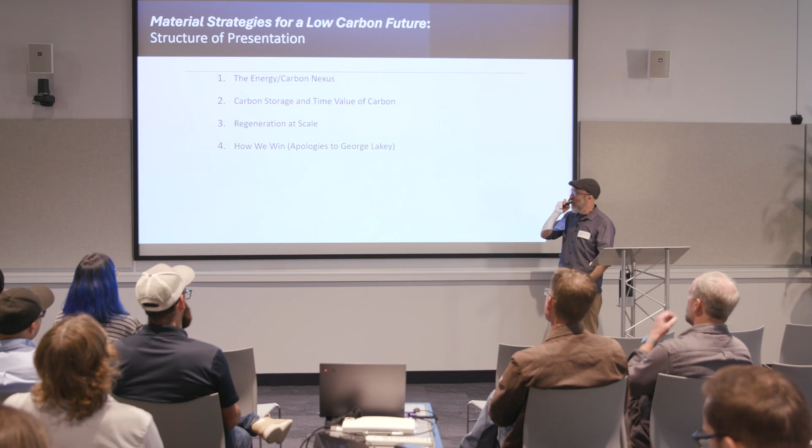I'm going to start by talking about the energy-carbon nexus, the relationship between energy and carbon emissions or greenhouse gas emissions, and particularly embodied carbon, and how we can start looking at them and thinking about them together. Then carbon storage and the time value of carbon — that's where it's going to get a little bit nerdy, but also super, super important as we expand our ideas around carbon flows and our relationship to carbon in the built environment. Then regeneration at scale: what this looks like in taking some of those principles and bringing them into practical application, moving from boutique niche applications to broader industry transformation. And in the end, how we actually all collectively work towards achieving industry transformation as a community and as an industry. So that's where we're going.

Let's start with the energy carbon nexus. And apologies, I don't have another monitor here, so I'm going to keep doing this so I make sure I know where I am.

So this is to level set with the first couple of slides here, to make sure we are all on the same page around how we think about buildings and the built environment and its relationship to climate impact.

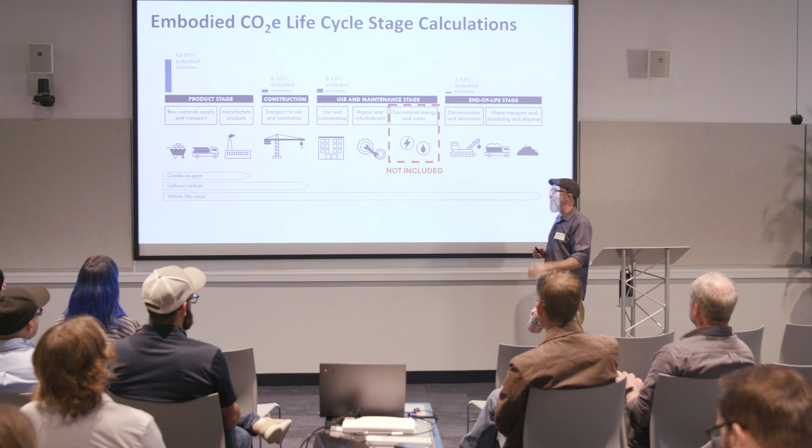So I want to start by defining a bunch of terms. When we think about historically the building's relationship with climate impact, that usually relates to the emissions associated with making energy to run our buildings. That's the operational energy and water part of the life cycle.

But in the entire life cycle of what it takes to put a building into operation and then through its life, that's only one part, and it's not even the beginning. We really start the clock at the extraction of raw materials out of the ground, or from wherever the provenance of those raw ingredients comes from.

The process of extracting those materials, transporting them to a manufacturing facility, and manufacturing them into products, we call that the product phase, the material emissions, A1 to A3 if you're an LCA nerd. That combined with the process of bringing all those materials to the site and combining them together to create buildings, all of that together is upfront carbon.

That's essentially the carbon footprint of the building at day one of its operation. Those emissions are already in the atmosphere. All of that impact has occurred because of decisions that engineers, architects, and builders have made around creating those buildings — others too, I'm just calling us into our participation in that process.

Cradle to gate, you'll hear that phrase too — that's the product stage, the gate being the factory gate. A lot of the analysis I'll talk about is within those boundaries, looking at material or product emissions. In low-rise construction, which is where I do a lot of my analysis, that's the lion's share of the emissions over the life cycle, so a lot of focus and data is for that phase.

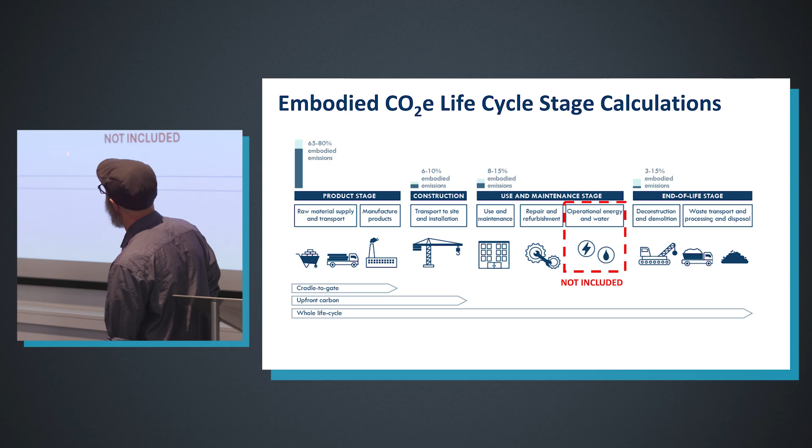Moving forward, now we're in the building — it's on, operated, and occupied. There's use, maintenance, repair and refurbishment, interior fit-outs, and mechanical replacements. You'll see those repeating over the course of time.

Typically there's less materiality going into the building during its use phase, but a whole lot of operational energy and water. This is not included in our definitions of embodied carbon — we look at operational energy separately from all the other emissions of buildings, and we'll talk about how we look at both of those together in dialogue and balance.

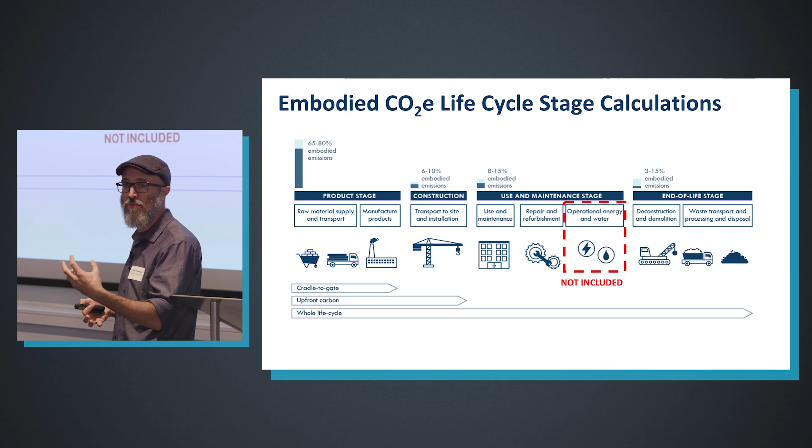Finishing out the life cycle, the end of life has its own emissions: deconstruction, demolition, transport, processing, and disposal. Often a lot of greenhouse gas chemicals are released from materials that may be bound in them, as well as the energy it takes to process the end of life of a building.

There's a D phase here not shown, which is recycling and reuse of materials — the end of one phase is the beginning of the next. So if you've heard of circularity or the circular economy, that's taking this unidirectional take-make-waste paradigm and bending it into a circle, seeing the outflow of deconstruction as the inflow of new materials to the next building. I'm hyper-simplifying here, but just making sure that concept is in play.

So when I use the language 'embodied carbon,' it's actually shorthand for embodied carbon dioxide equivalent emissions — too many words to say otherwise. Embodied carbon technically refers to this entire life cycle, again except for the energy and water, but often it'll be used to describe just one part of the life cycle.

If we're just looking at the product stage, that word will be used for different parts of the life cycle, which is where this all gets really confusing. Even the word embodied is confusing when we start talking about carbon storage. So I'm going to acknowledge the confusion around the language, and if anyone's confused around terminology, that is legit, please ask for clarification so we all know what we're talking about. This is why I'm taking a minute to just define some terminology and some boundaries and principles here.

Oh yes, so CO2e, I want to define that. When you see that little E at the end of CO2, that stands for equivalent. To get an actual metric, a single unit that can quantify the emissions from any part of these processes or the whole process, it's not just carbon dioxide. That's not the only greenhouse gas being emitted. There's methane, there's all sorts of propellants that can be incredibly potent. There's a whole constellation of chemicals that we release, but it's really complicated to try to look at all of those individually.

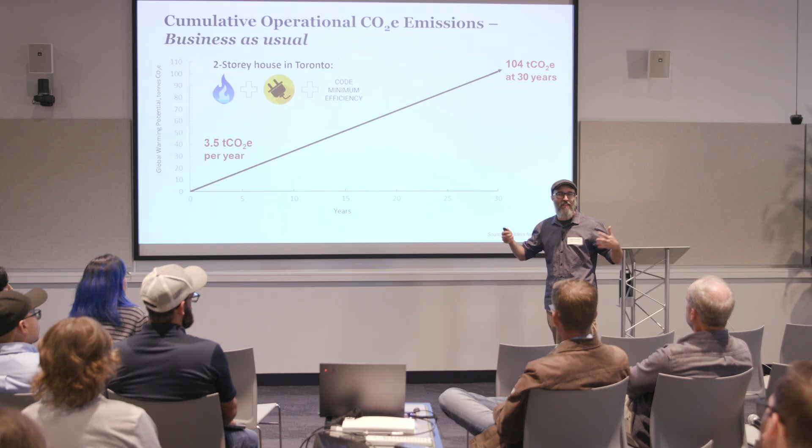Okay, so let's start with some of the basics, just to make sure we're all on the same page. This is stuff that we are already doing and know how to do well. When I work with builders for climate action, we do a lot of research, and a lot of our focus is on the residential construction side of things. So you'll see some references here to low-rise residential, but the principles apply to essentially all buildings, with some exceptions.

If we look at a two-story house in Toronto that has an energy mix of natural gas for heating and hot water, plug loads for electricity for lighting, and plug loads for cooling, built to code minimum efficiency, a typical Toronto building is going to release about 3.5 tons of emissions per year, year upon year upon year. So over 30 years that's about 100 tons of emissions - that's the business as usual case.

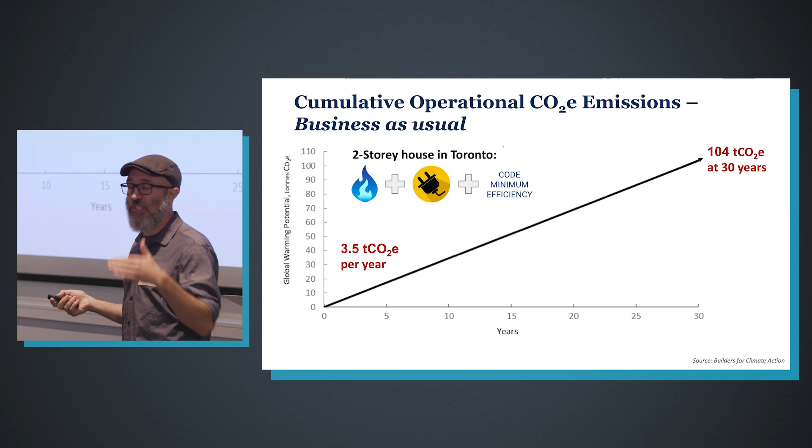The work we've all been doing as an industry for generations now is to reduce the energy loads, and more recently to get off the more emission-intensive fossil fuels into renewably powered electricity to reduce emissions from the energy we're consuming. So we turn this into a high efficiency building, improve the enclosure, reduce the loads, and switch everything over to electricity. Toronto's grid is relatively green, or low emission, and so that really reduces the annual emission profile of that building - a huge reduction in emissions. We know how to do this, we know what the strategies are. The real challenge now is just doing this all the time for all of the buildings. All this language around scale, industry transformation, and the electrification revolution and transition - that is what this is.

There's always new technologies and new approaches and new ways of getting there, but this is what our task has been for a while. It is absolutely critical and imperative that we continue along this path.

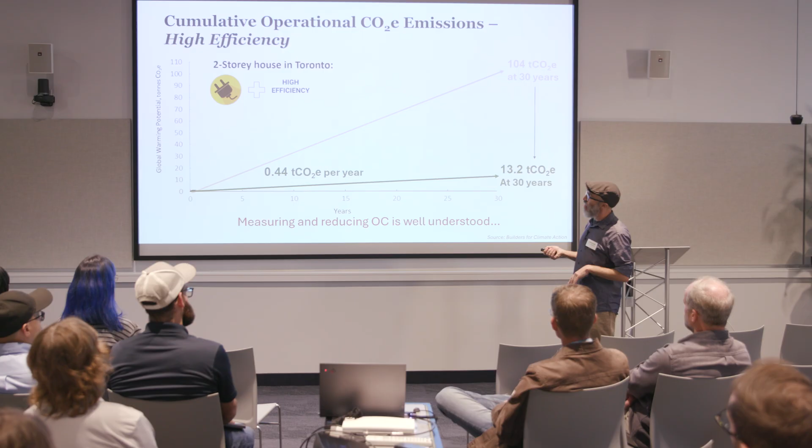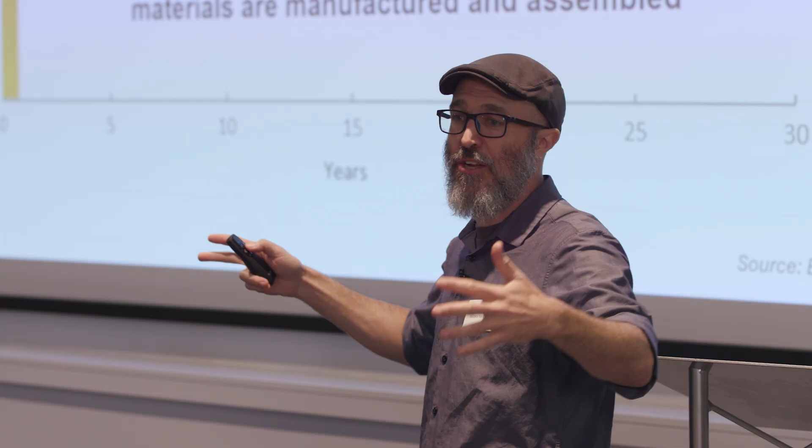This is not an accurate graph, because we don't actually start at zero, and we don't start on day one of operation. As I mentioned in the last image, there is a footprint to the building when we start the operational phase. If we're trying to set goals around decarbonization by, say, 2050, we need to know what this is to actually know what our emission profile is by the time we hit 2030, 2040, 2050, whatever number we're trying to get to. So that becomes a pretty critical part of the analysis we need to bring in if we're trying to reduce these loads and switch over to electricity for the endpoint goal of reducing our emissions. If that's our goal, we need to have our analysis boundary wide enough that we know what that initial footprint is and address that as well in our strategies.

And so that's where these material carbon emissions come into place. That's really the upfront emissions. It's transportation and construction as well. And it gets a little more complicated to do those last two phases. We can talk about that over beer or Q&A. But suffice to say, those upfront emissions, plus not only the energy that we're using, but the energy source emissions that are released from that energy - those are all part of the equation.

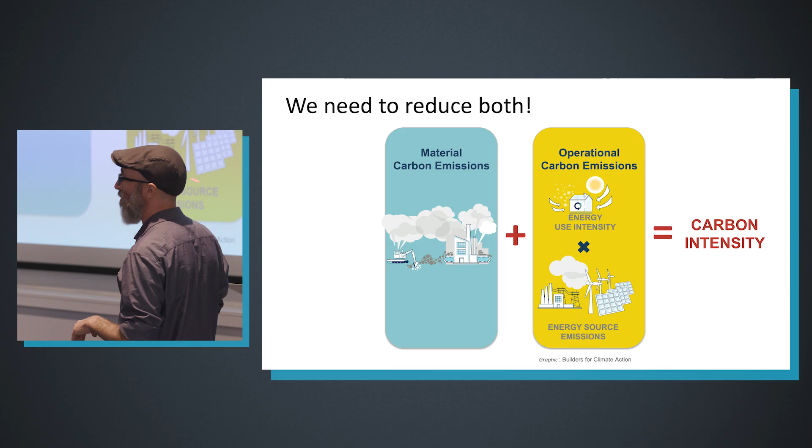So for a long time, energy was a proxy for climate impact. And it's just not that simple. That is critical - we definitely need to bring our loads down for a host of reasons, and we'll talk about a bunch of them. But where that energy comes from and what the emission profile of that energy is, is also crucially important. That's where the electrification movement, and bringing down peak loads, and a lot of the nuances and details around electrification show up here. And then all those other upfront emissions are all necessary to understand what our carbon intensity is and to hit our near-term climate reduction goals.

So we also have data to back this up. It's not just theory - we have studied this repeatedly over many different buildings, and we consistently see the same results: that it's not until we're reducing both the upfront and particularly the material emission profile of our building, as well as the operational performance and the energy behind that building - if we're not solving for both of those problems, we really just don't get to low carbon outcomes. So there's data to prove the thing I was just talking about.

So I want to call out some of the confusing - I'm going to try to be generous and diplomatic here, and we'll see how long I can keep that going - some of the confusing analysis I'm seeing in the marketplace that I want to address directly, because this is getting more confusing as we move forward in time, and that is a major risk to adoption, to making change. Anyone that has been on the sales side of this whole building world, or really anything, the number one barrier is confusion. If someone is actually fired up in opposition, like 'oh wait, there's an entry point, we can talk about this, that, or the other' - but if people are just confused, it is a barrier to taking action.

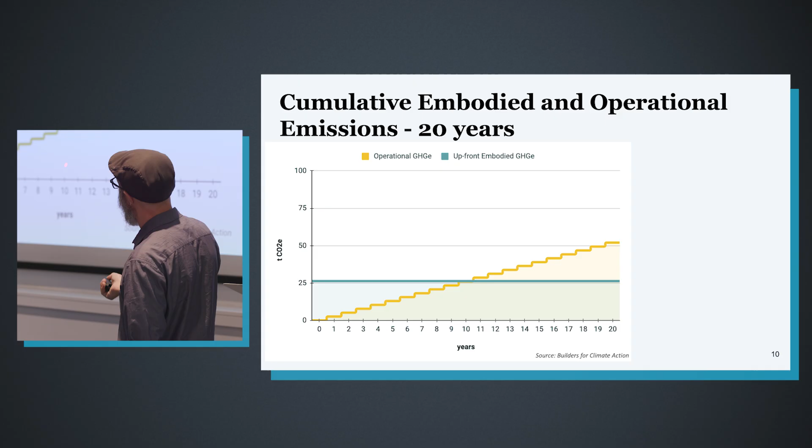So I want to talk about some of the confusion that I see in the market, which is this: I'll often see analysis like this, that we've got year upon year upon year of operational emissions, and then there's an upfront emissions line that gets drawn across, and then we look for that point where there's a crossover point. Let's say there's a balance point, or even worse, payback after 10 years.

How do we use that information to make good decisions around decarbonization? Right, I don't think it is useful. I think there's some very specific cases, maybe around material reuse - or let me say it this way: if you need to figure out what that balance point is, you've already lost control of a whole lot of the conversation around the outcome of the building. Balance point's in the past. That's a great way to describe it.

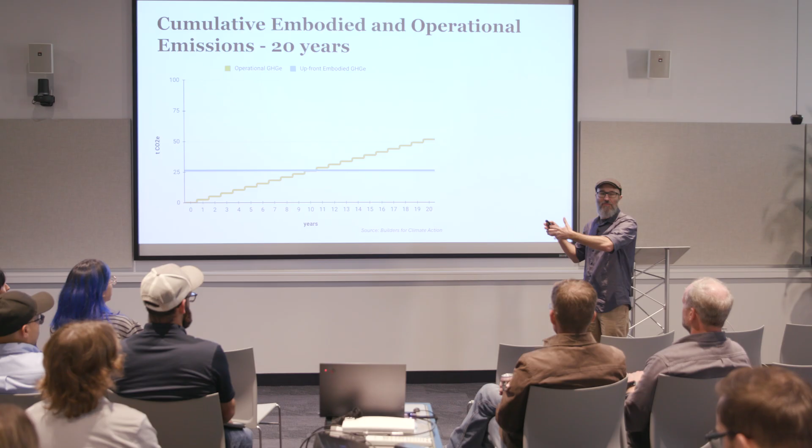Yes. So if you are seeing conversations around this, be critical as to why - what is this frame, and what is the information we're supposed to be getting out of this. This is also not technically accurate from what the atmosphere is experiencing. The atmosphere sees this: we're starting at this point and then adding more, and we don't get to zero until we reduce both.

So I want to try and simplify some of the noise around trade-offs and balance points. I see a lot of this coming in the conversation of insulation. We need to solve for both problems and get to zero across these various timescales. I want to float that out there to dispel a lot of confusion, as these ideas become more socialized and we're all trying to figure out the relationship between materials and energy. That's number one. We can talk more about that if you'd like, but put that down for now.

I want to look more explicitly at some of the strategies we've been using to reduce operational emissions, and then how that relates to the embodied emissions that come along with those strategies. The TLDR is that in pretty much every case we've found, there is at least an opportunity to significantly mitigate the embodied emissions from the materials used to reduce operational energy, if not actually reduce both. It's just a matter of developing strategies that hold the whole and consider both the embodied and the operational emissions.

My favorite one is reducing building size and surface area. Do we need to build the largest building our budget can afford, or do we build the smallest, best building that the programming requires? We don't always have the opportunity to ask that question, but for those of you that do, it's fundamentally important. And does the building have to have 18 corners? Could it have 10 corners? Could it actually have 4 corners?

The hero architects in my eyes are the ones that can take simple buildings and make them look incredible. Because that's the category where we know that by having more corners, we're increasing thermal bridging potential, increasing disruptions and air bypasses in our air barrier, and absolutely increasing the cost.

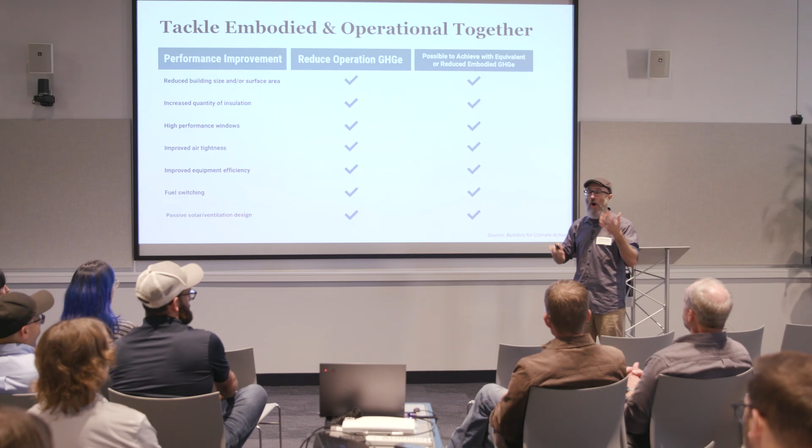When I was in construction project management, we would often do our pricing not by cost per square foot, but by lineal feet of construction, because that's where all the construction costs go. On the materials side, we're consuming way more materials for that complex, increased surface-to-volume area, as well as the amount of waste because of all the weird sizes and shapes, and the waste profile goes up significantly. So if we can solve for waste, embodied carbon, operational energy, operational carbon emissions, and cost with the same move, those are the strategies we need to identify early and lean into.

The win-win-win-win-win strategies are crucially important. So there needs to be a much better justification for why that building has 4 different roof profiles and 18 corners if it's causing penalties all along the rest of the pipeline.

Insulation is another really interesting one. There's a version of the story where we're consuming more insulation to reduce the operational emissions of our building, but that insulation has an embodied emission profile, so that number goes up. If we recognize there's a potential conflict there, that compels us to spend a little more time and energy to find a lower emission insulation, or maybe even an insulation that actually stores atmospheric carbon, and win in both of those categories. But we have to identify that we need to solve for both of those problems early enough to bring that into the strategy.

We can keep going down the list. I'd actually be happy to go down the list. I'm a little worried about getting completely distracted and blowing our time entirely, so I'm going to keep moving forward. We can talk about windows and air tightness, all these other things.

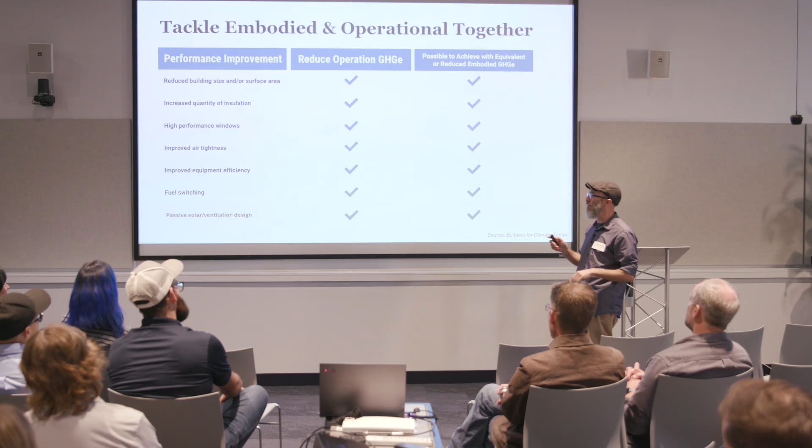I am going to talk for a minute about mechanicals, because that's fascinating as we're seeing the proliferation of heat pumps entering the market to support the electrification process and solve for the energy and operational emissions side of the equation. I have a mechanical design background, and I've been studying the emissions of MEP equipment pretty heavily the last few years.

There's another win-win-win scenario that shows up here: the old approach for sizing equipment was to significantly oversize it, to make sure there weren't callbacks and everyone had all the heat they needed in the wintertime. What we're finding now is that when we oversize heat pump equipment, it has really negative consequences on occupant comfort, and very negative consequences on the energy efficiency of that equipment.

The oversizing can lead to short cycling, which will depreciate the life cycle of that equipment, so it becomes more expensive and needs to be replaced more frequently. What we also see on the embodied side is you're using more equipment, which is typically pretty emission-intensive, like circuit boards, metals, and highly processed equipment.

Those larger pieces of equipment have greater refrigerant charges and often much more complex refrigerant distribution systems within the building, like larger and more complex VRF systems. What that means is refrigerant has some of the highest CO2e ratios of any of the materials we use. R-410A, which up until recently has been the typical refrigerant for smaller systems, is 2,100 times the impact of a molecule of carbon dioxide.

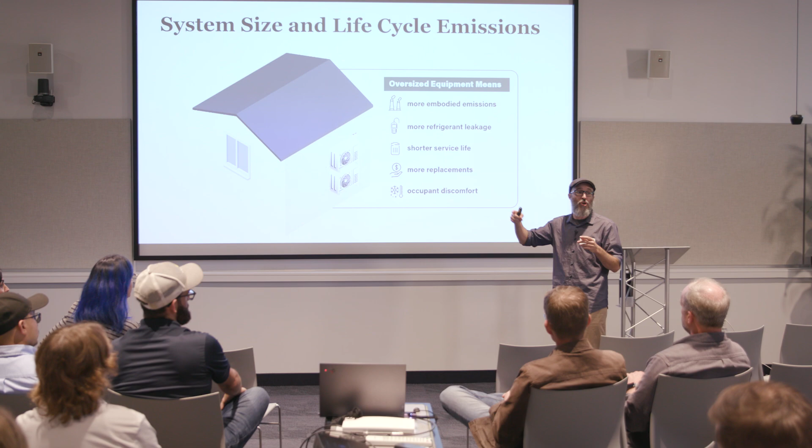Now we're converting all of our buildings to be on refrigerant-powered systems. So if we're oversizing those systems, we now have more refrigerant that could potentially leak, and as they get more complex, there are more potential points of leakage across that distribution system. As we reduce and right-size all of that, we're also solving for these embodied carbon emission problems associated with heat pumps. So again, win, win, win, win.

By revealing that value, it can compel us to spend a little more time on mechanical sizing and right-sizing the mechanical system. Maybe even moving from a VRF distribution, a refrigerant-based distribution, to a hydronic-based distribution, which not only reduces all that refrigerant, but makes controls easier and reduces the risk around oversizing, particularly on the cooling side of things.

So again, all these points of alignment, but if we don't recognize that they're aligned, they're really hard to defend when you're trying to usher a project through all the stages of design and all of the associated first-cost filters that tend to make a lot of these optimization opportunities fall by the wayside as we go through the complexity of bringing real buildings into the real world, let alone the replacements.

Because remember now, if we're short cycling a piece of equipment that goes from a 15-year lifespan to even a 12-year or 10-year lifespan, that means you're just repeating that entire consumption and disposal cycle again and again with that much greater degree of frequency within the lifespan of the building. So there's a lot of alignment here.

This graph should look pretty familiar. This is a very typical graph around cost, and the best way to address cost in a project is very early on, where you can make the greatest number of moves for the least amount of effort.

We've also seen this. I have an energy modeling background, and this was sort of drilled in. Oh, that last little part. Imagine this continuing, I'm not quite sure why that didn't show. Maybe it's white, I don't know. Anyways, apologies, but you can imagine that continuing along there.

Very similar with energy efficiency. Anyone in the passive house community here? Some nods, okay. So anyone, whether it's passive house or net zero or whatnot, anyone's been in the experience, and those of you in the construction space, I imagine, have probably heard this.

We're like, all right, our building's basically done. It's the end of DD, or you're looking for some feedback. Can we make this a passive house building now? No, you can't. That ship sailed like an entire phase ago. That was three months ago. We could have said no problem, but now it's really expensive to try to implement that, right?

It's the same thing with all this carbon reduction. So really the first question is, if you have the agency to say, do we actually need to demolish something and build something new, or can we work with what already exists? The lowest carbon building is the one that's already there, with some exceptions, but for the most part that's a general principle.

So anyone that has agency of even being able to answer that question, that is the highest hand on the lever we have. If it's adaptive reuse of existing infrastructure, all the emissions of its construction are already in the atmosphere. From that point, yes, does it have to be enormous? Does it have to be complicated? Do we have agency, from a design perspective, in reducing that impact? And I'm going to say that's not just for designers.

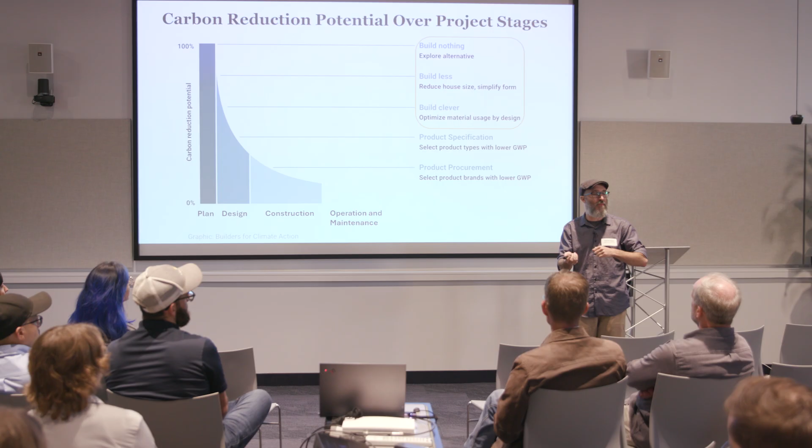Building clever is, can we simplify the structural grid? Are there mechanisms we can use to dematerialize the building, saving cost and also saving materials at the same time? By the time we're trying to look at what is the right insulation product to use or what's the best cladding, I'm not saying that's bad. We can make enormous benefits in just optimizing for the best drop-in replacement of a high emission material for a low emission material. But your options are down to here, right, so many decisions have already been made. There's only so many more decisions left to make if you're only looking at materials.

But that's a great place to start. So if you're new to all of this, simple one-to-one material substitutions is a great walking in the doorway to explore what are my opportunities on the material side. And the further up the line you go, the more opportunities there are available.

If there's ever been a justification for the value of integrated project delivery and bringing construction and design knowledge into the project development process, it is this. So there's yet another value, not just in project efficiency in terms of its delivery and making sure that what happens in the field is actually what's represented in the drawings, but also to be able to really optimize for carbon reduction.

So to explain this in simpler terms, when we've been thinking about the built environment's relationship to climate impact, it's been like this left side of the image here, where you've been extracting carbon reserves from deep underground that used to be plants and animals. They were part of the biosphere millennia ago, and over a long period of time and geologic pressure have been consolidated deep underground. And we are dramatically intervening with the carbon cycle by extracting it from those deep, long time cycle stores and burning it for energy, and then the byproduct is migrating that carbon up into the atmosphere.

So we've been participating in accelerating a carbon flow cycle from a storage state deep underground up into the atmosphere. And the goal is to do less of this. Actually, the goal is to do zero of this.

So all of the energy management transition we're talking about in the first handful of slides, that's this, to which I'd say absolutely critical. We need to be doing more of it better and more efficiently and faster. It is completely imperative, foundational, necessary, and wholly insufficient if our goals are actually to reduce the chemical balance of the atmosphere.

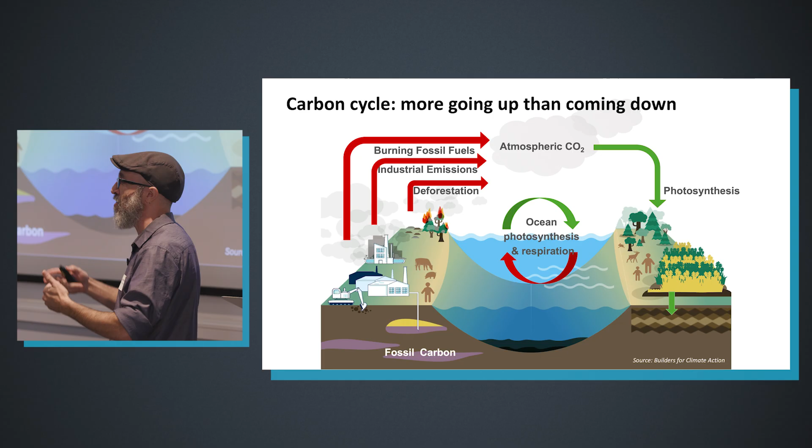Zero is not a sufficient goal. If that is our goal, zero operational carbon, that's fine, but that's not actually addressing what it means for us to continue to maintain human civilization the way we know it. If that's the goal, then we need to widen the boundaries and look for other opportunities to adjust the imbalance of carbon concentration in the atmosphere, in this case, in the form of carbon dioxide and associated greenhouse gases.

So I'm going to invite us into two other concepts. Does anyone know what the largest sink of carbon is on the planet? The ocean. Like, how much of the carbon in planetary ecosystems are in the ocean? Like 78%, roughly. Those are numbers I've seen. Like the majority, right?

So if we really care about atmospheric carbon balance, then everything we can do to keep microplastics and forever chemicals and phthalates and all this toxicity out of oceanic ecosystems that are depleting those ecosystems and depleting the ocean's capacity as a carbon sink, that's every bit as relevant or maybe even more relevant than our direct emissions. So this is how interconnected all of this work is.

I'm not going to be talking about oceanic ecosystem health and plastic and toxicity proliferation in this presentation, but I absolutely could. John, question? Just clarity, when you're talking about carbon in the ocean, are you sort of thinking about that as sort of available cyclical carbon or sort of stored carbon the way that fossil carbon is?

Oh, so the question is, like, the carbon in the ocean, is it like deep, long storage like it is in fossil carbon, or is it more cyclical? It's much more cyclical. I am not qualified to get into the details. However, I know there's numerous different capacities and rates of storage and transfer between plants, flora and fauna in the ocean, as well as within the water itself, and its relationship with the atmosphere, as well as with other pools. So it's really complex, very dynamic, but much more dynamic than the long time cycle of storage deep underground.

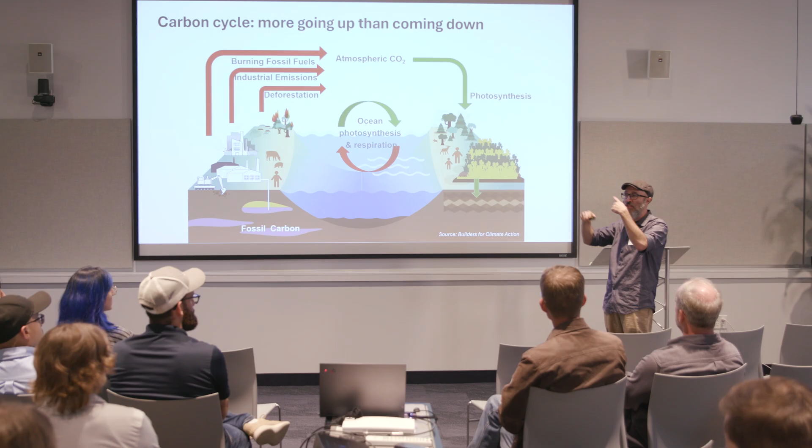What I will say is that this is something we have direct agency in. We have direct agency over mitigating harm here. We have direct agency in spending billions of dollars of our consumptive power as an industry consuming products, to spend some of that money on sustainably managed forests and agricultural systems that are already doing this and managing the carbon flows coming out of those systems that right now are just going back up into the atmosphere when the residues coming out of forests and agricultural systems just decompose or burn and go back. So we can positively and proactively engage in managing the carbon cycles, the same way that we're proactively and negatively engaging in the carbon cycles on the left-hand side.

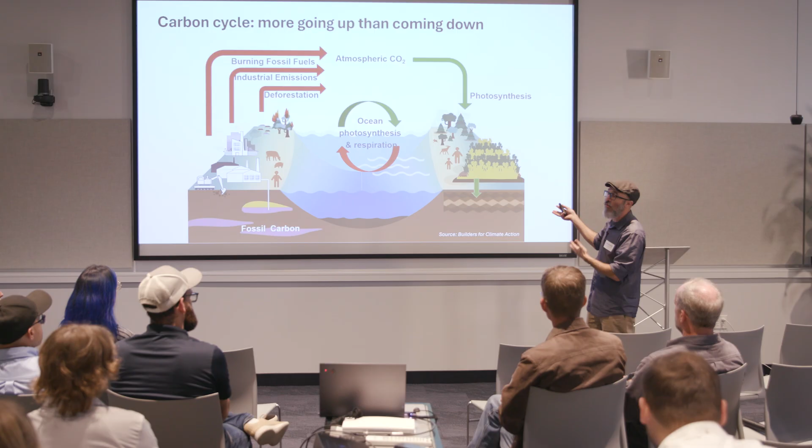I really get frustrated with the idea that, oh, humans are just a cancer, and if we were just off the planet, it'd be fine. I'm like, or we could actually recognize we have the capacity to do good as well as harm, and leverage that to proactively take action to decarbonize the atmosphere through investing in systems that are already doing that and manage the carbon flows of those systems well right now. So that's what I'm going to focus on a little bit.

This isn't just theory. This has been very well researched. The most comprehensive research I've seen comes out of the UN with a bunch of folks from the Yale Center for Ecosystems and Architecture that have done both technical and economic studies around this at scale across the globe. That's a great resource if you want a little more meat on the bone than just my quick visual narrative around this. There's also a really strong market imperative around this.

Amazon has been funding really terrific research by well-qualified, neutral forest industry professionals to figure out sustainable forest supply chain management, because it's in their business case to do so. And it's not just Amazon. This isn't just environmentalists or academics who care about this—there's a very strong market drive and market imperative around figuring this out, just in case anyone's skeptical as to whether this is all just hooey.

Question: when they talk about sustainable, do they care about people as well, or is it just about embodied carbon? That's a great question. This report—I'd have to look into the details to understand how much social impact is valued here. I know it's broken out geographically based on different forest typology, and associated industries are evaluated, but whether human well-being or cultural well-being is held as a key performance indicator of success, I don't know. That's a crucial question, and I'm actually going to talk about that briefly, so thank you for prompting that thought—it's coming up shortly.

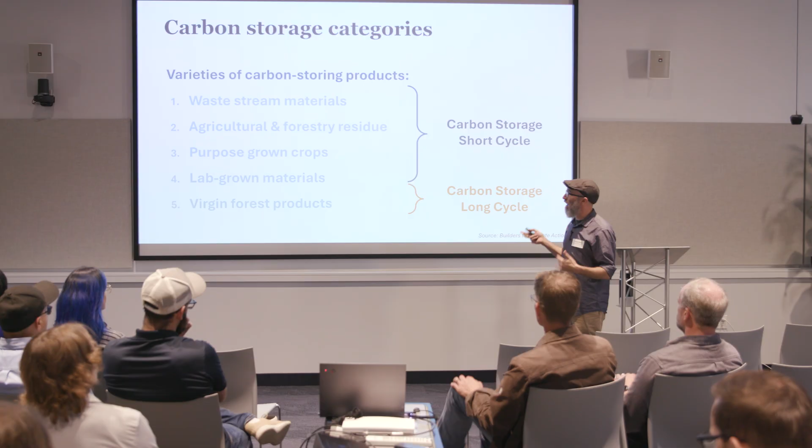Builders for Climate Action is really committed to advancing this idea and revealing the opportunities around working with bio-based materials as a near-term solution for atmospheric decarbonization. We recognize that if we're just talking about biogenic carbon as a big lump, we just talk about trees—which isn't bad, but it's incomplete. We need to break this down further to develop more granular and a broader diversity of strategies around working with bio-based materials.

So we have two basic categories we've assigned: short cycle and long cycle carbon. The short and long cycle refers to temporal cycles, time cycles. We're looking at plants that are less than 10 years in their growth cycle, or carbon that's going to be near the end of its life cycle soon, compared to plants that live a really long time—decades—through which that carbon will go through its cycle.

Examples of short cycle carbon: waste stream materials. Has anyone worked with cellulose insulation? This is cardboard—a whole bunch of Amazon boxes destined for the landfill. Some of that may be petrified, but a lot of it's either going to turn to methane or carbon dioxide. So we're appropriating waste stream materials destined for their end of life, intervening in that cycle and reappropriating those materials to be long-lived building materials, keeping that carbon stored in physical form out of the atmosphere.

Ag and forestry residues work similarly. Otherwise they would be going through their end-of-life cycle and cycling back into the atmosphere. We're talking about intervening and interrupting that cycle, redirecting those physical carbon stores into physical materials that stay on the planet—stored in a building for a long period of time, turning buildings into carbon sinks for the lifespan of that building. If a crop wasn't going to be grown otherwise, then it wouldn't have pulled that carbon dioxide out of the atmosphere, and so on.

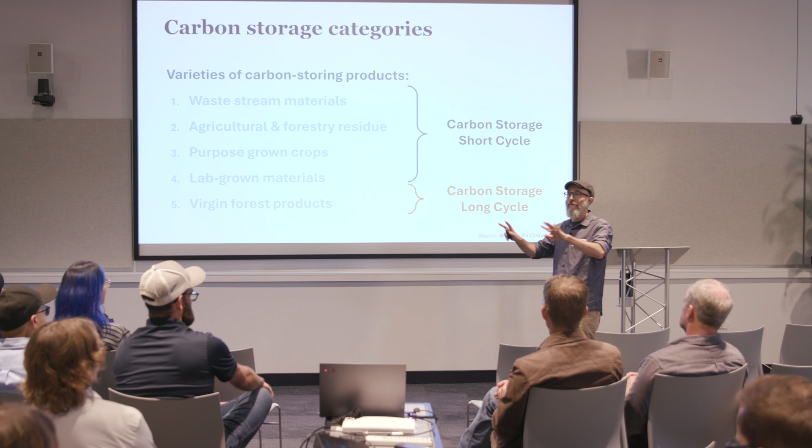So we want to disaggregate this to identify that some of these are falling off a log easy—yes, take waste and turn it into something valuable. There are no counterfactual scenarios to what else might have happened to that cardboard, other than maybe an arts and crafts project, and that hasn't been scaled out to be a meaningful carbon storage solution. Other things, like timber, it's hard to know whether the atmosphere benefited from that logging operation. It's complicated, and we may not actually know the answer with a high degree of certainty. That's why we're disaggregating this.

For those of you that are visual learners, I'm going to say the same thing again, but with pictures. We build with straw a lot, so I'm using straw as a case study here.

There's an annual aerial growth cycle for most grain crops. Some of them are perennials, but I'll move past the botany—say an annual cycle for these plants to grow.

At the end of the year, all the seed heads get cut from the plant to make grain. There's no version of that grain plant where it continues to grow year upon year. That's a very short cycle of growth, death, decomposition. Some of that goes down into the soil, but a lot of it ends up in the atmosphere, either because of the nature of the plant or the nature of the agricultural practice.

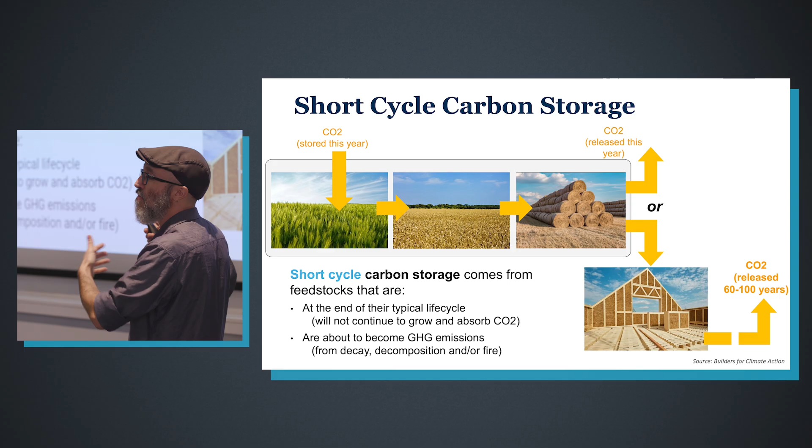Our suggestion is, rather than allowing it to go through that short cycle, we intervene and grab that carbon before it goes through its end of life cycle, turning it into the beginning of a building material that will now be captured for the lifespan of the enclosure. In the case of insulation, it also reduces operational emissions by providing a high-quality insulation solution, and it displaces mineral or petrochemically intensive insulation products that might otherwise be used. So it's win-win-win.

Those are strategies to lean into that have an amplifying benefit beyond a simple material replacement. We want less waste coming out of our agricultural systems and more storage capacity within our buildings. This seems really obvious and clear to us as a practically viable solution. I'll give you a case study on that shortly.

This is really different when we're talking about trees—a 30 to 60 year growth cycle on the tree. Because of that, and various other factors, forest ecosystems are a heck of a lot more complicated than a lot of the agricultural systems that we're getting those grain products out of.

First of all, would that tree keep growing or not? That's a fundamental question to ask, and it depends forest by forest, and we might not even necessarily know. Forest fires are showing up in places they didn't used to before. Pests are proliferating across North America as the climate changes within this continent in ways it hasn't prior. So this just gets harder to predict.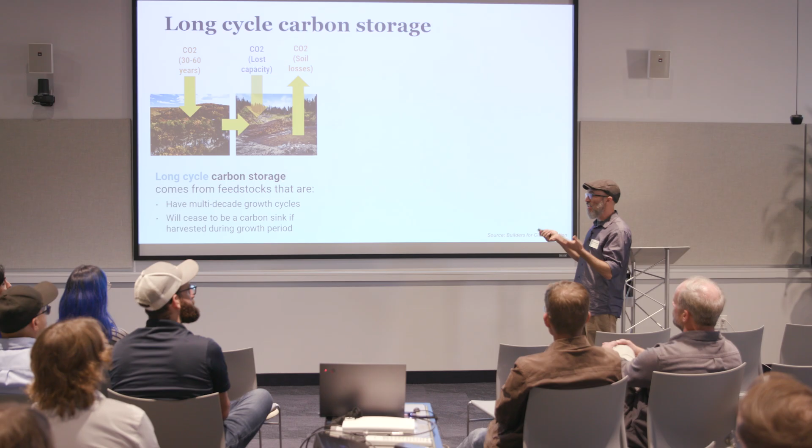Also, depending on the forest and the product, maybe 50% of the mass of that tree may be left in the forest to decompose. Some of that may be good for forest ecology, but a lot of it may not actually be necessary to have all that biomass just rotting away in the forest. In many cases, it's actually burned. Then there's also mill waste and kiln emissions—so all that to say, it's complicated.

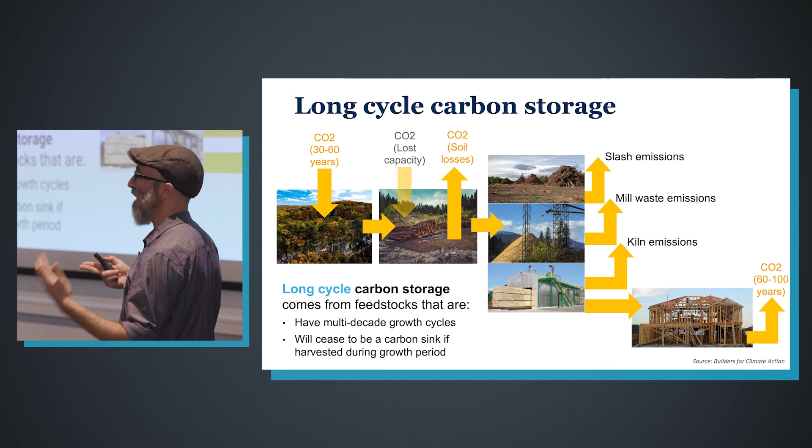I live in a forested region. I've been on the commercial side of forestry projects before. Some of my best friends are loggers. I'm a big fan of forestry and wood products as a solution, but we have to understand the complexity. Just assigning it value is an oversimplification—there's more nuance needed around whether or not, if that tree was cut down to be part of our building, the atmosphere actually benefited from that happening. That's a harder question to answer than grabbing the straw off the ground before it gets burned.

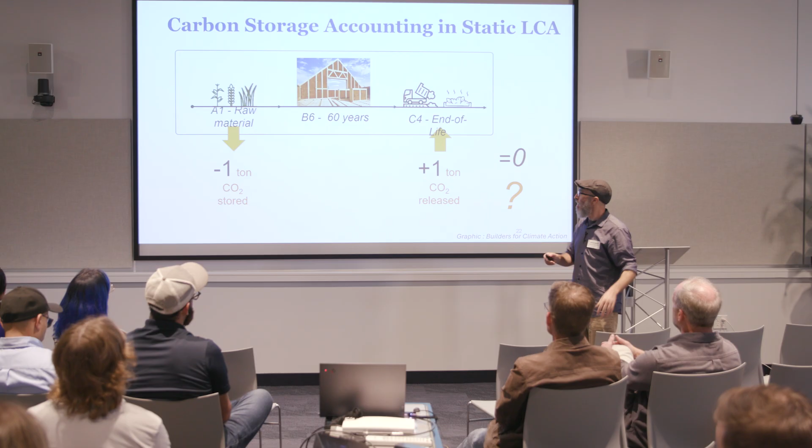Okay, this is where I'm going to get nerdy, just fair warning. For those of you in the LCA community, you're like, yeah, negative emissions—oh, that's probably the thing to say.

In looking at all of this, we can actually quantify the amount of carbon dioxide that's been photosynthesized, look at the mass of carbon in that product, and what the equivalent carbon dioxide was to put that carbon into that tree or into that straw, and assign a negative emission. That carbon dioxide was in the atmosphere, and now it's not—it's stored in the building. The value of that is reflected as a negative emission.

And a lot of LCA, life cycle assessment methodology, would say you can't just give it a negative emission when it's grown and then ignore what happens at the end of its life. We have to presume those materials will go through end of life—it may not be for a while, but we have to assume it'll eventually end up back up in the atmosphere. And you can't just use the good number and ignore the bad number.

Particularly if you're only counting the product emissions, it's like favoritism, it's not good analysis. To which I would say, yes, that's totally legit. That is absolutely an appropriate critique and really a legitimate methodology for how we think about biogenic carbon in this context.

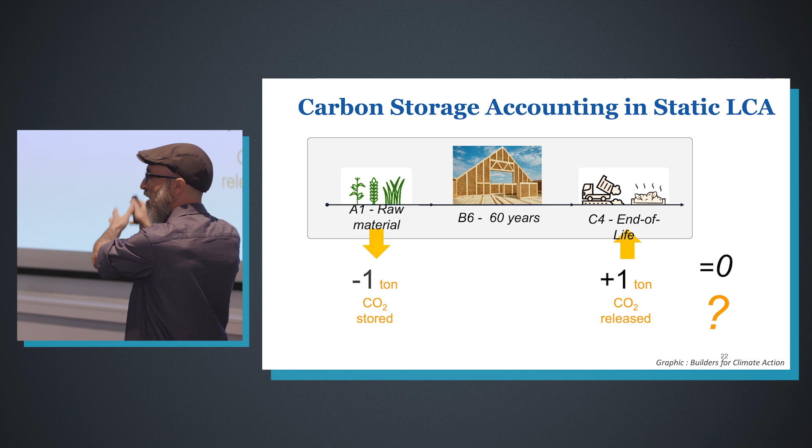It's just not the only way that we can or need to think about our relationship with stored carbon, because this methodology doesn't consider what is happening over that intervening 60 years of time. It's just looking at a negative number at the front, a positive number at the end, that equals zero, and we're done. But this time matters.

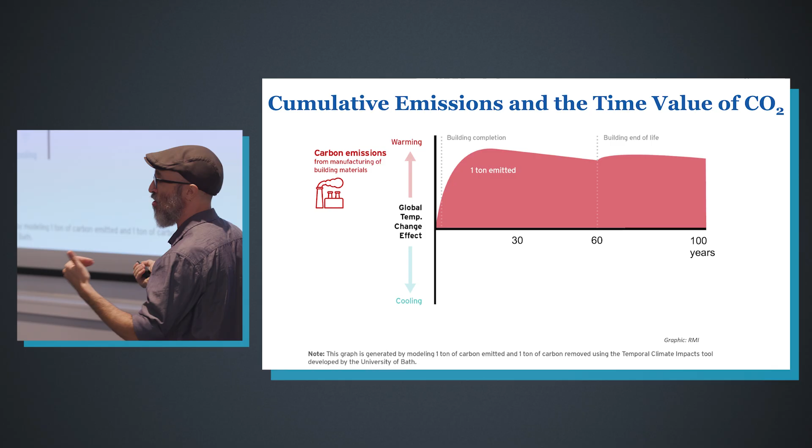So that's what we're going to talk about for a moment here. If we're looking not just at the number of kilograms of emissions going up or going down, but at what the effect over time is on temperature change. And so the metric here is actually radiative forcing, for you climate nerds.

If a pulse of emissions, a ton of emissions, is pulsed up into the atmosphere, it doesn't just last for a year and go away. It stays in residence in that atmosphere for an exceptionally long time if it's carbon dioxide. Other chemicals have a faster decay rate. You can see this bends down a little bit because the carbon dioxide does decay over time, but it takes hundreds of years for it to go through its decay process.

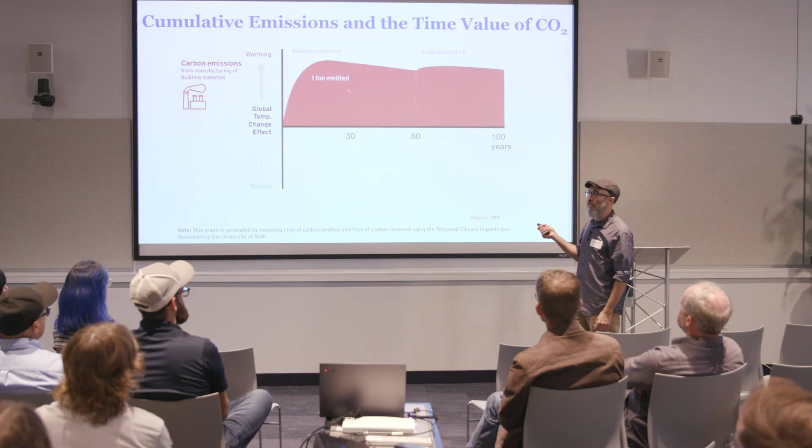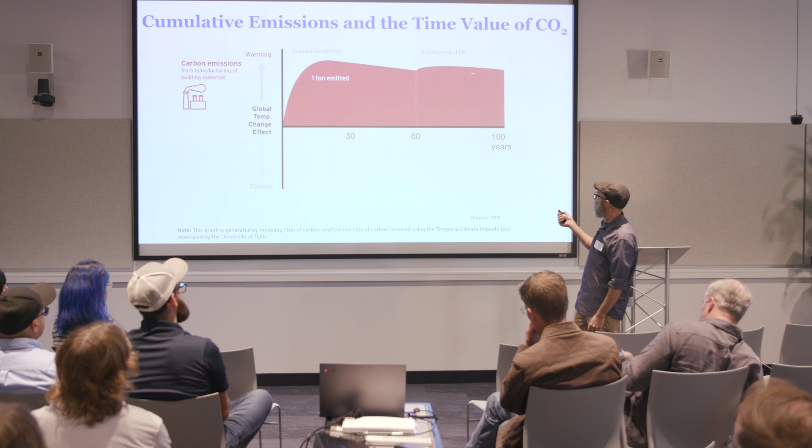If we look at this from the perspective of stored carbon, this isn't just emissions that were avoided. This is actually carbon dioxide that was in the atmosphere and is drawn down out of the atmosphere into the body of a plant that is then put into a building for an extended period of time. Over that period of time, that is a very significant impact on having that carbon dioxide removed from the atmosphere.

It's sort of corollary to if it was introduced into the atmosphere. And so even if we assume 100% of release at the end of the 60-year lifespan of the building, that only has a 20% impact on temperature change based on its initial storage compared to if a ton of it was fully emitted. So that means we're basically buying ourselves time.

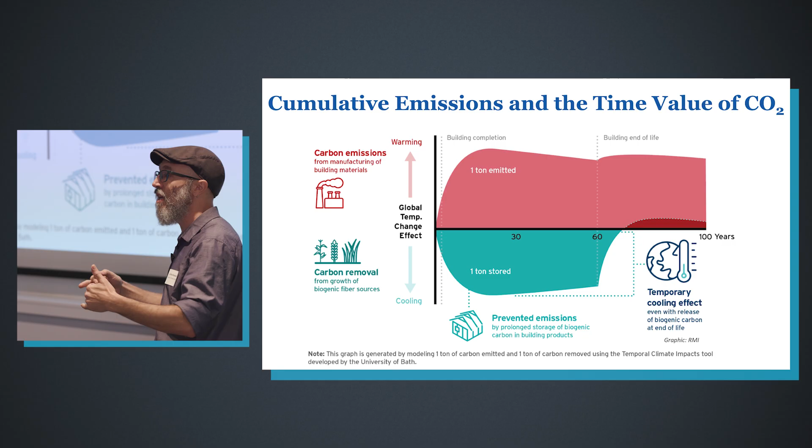If we can buy ourselves, over a 60-year period of time, a way to figure out how to manage that carbon better and not have 100% of it back up in the atmosphere, this is where principles of circularity and material reuse dovetail beautifully with the concept of biogenic carbon storage, so that we don't just have to throw it all back up into the atmosphere at the end of that building's lifespan. Then we have a net permanent cooling solution from that stored carbon.

This impact of time really matters from the perspective of mean temperature change on the planet. It's not enough to just not add additional emissions, because the emissions that were released stay there for a long time, and we're going to see temperatures increase into the future even if we hit the zero point tomorrow. So we need active decarbonization solutions now to counterbalance the fact that we've already overshot that planetary boundary. And that's where the storage mechanism becomes really important for us, not just as an idealistic future-casting strategy, but as an immediate strategy for decarbonization in the built environment.

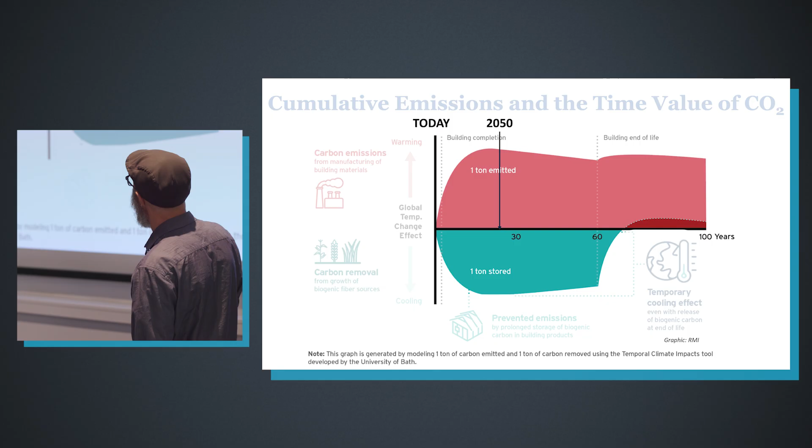The other thing I'll say is, if we're trying to hit goals for 2030, 2040, 2050, it makes no sense to me that we'd use a 60-year time boundary in our carbon balance to apply towards a goal that's happening in the next 25 years. So if we're not just looking at the life cycle and a 60-year lifespan as where we're hitting our carbon goals, we need to hit carbon reduction goals by 2030, and then another set of goals by 2050. We need analysis that actually maps to that.

And if we're looking at stored carbon, it has not been re-released into the atmosphere unless you built a crappy building that only lasts for 15 years. It's still being stored, and that's really meaningful for our near-term goals. Not that it doesn't matter what happens in 60 years, but if we don't figure this out in the next 10 to 25 years, we have a very different set of problems to solve 60 years from now.

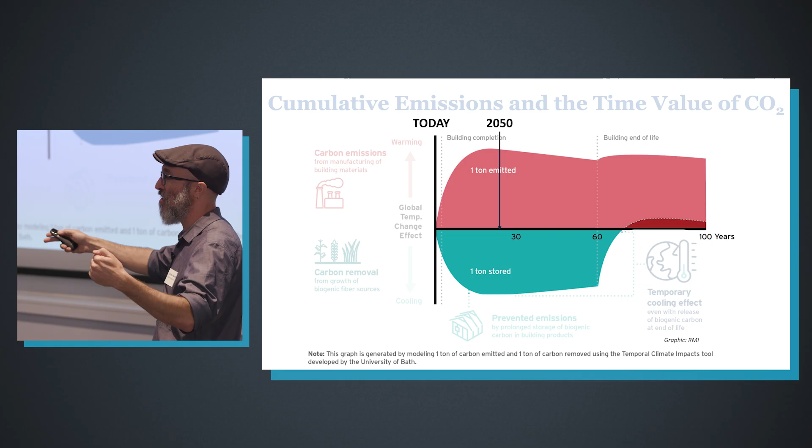So we just need to align how we're looking at this with the right time boundaries for the goals that we're trying to hit, so that our strategies are aligned with our goals that are aligned with good analysis. And that's where this time value of carbon becomes really important, not just looking at 60-year boundaries for all of our metrics around how we evaluate our carbon emissions. I know that was nerdy, I appreciate you staying with me.

I'll use money as an analogy. Yes, we need to look at the ledger of debts and credits in our checkbook, but that doesn't tell us anything about compound interest or the time value of money. We look at money from multiple different perspectives. My background is as an energy modeler, I would never use my annual energy loads to size my mechanical equipment. I would never use my peak energy demand to size my solar system. We are used to looking at things from more than one point of analysis to make different decisions, and we need to do the same thing with how we're looking at embodied carbon and carbon emissions as well.

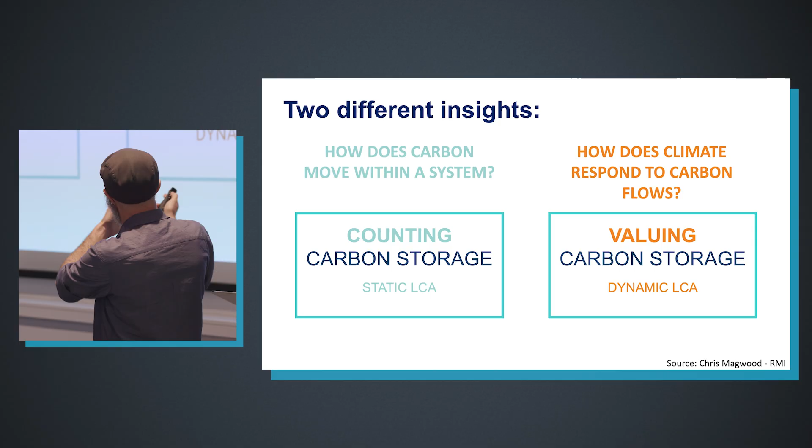That is better analysis. So if we're looking at how carbon moves within the system, and what is the accounting of that across the life cycle, great, +1, -1 static life cycle assessment, totally appropriate. And if we're looking at how the climate responds to those carbon flows, which I would say is what actually matters in terms of actionability and the purpose behind counting carbon in the first place, it's not an accounting exercise, it's because we're trying to stabilize the planet. So that actually matters, and we need to look at this time value as well if the goal is to create good adaptive strategy in the near term.

Clarifying questions? I know that was a lot. I appreciate it, we can keep talking about this.

The question is, is that decision appropriate? It's appropriate if you say all wood qualifies as a negative emission, it was in the atmosphere and now it's not. The logical conclusion of that could be deforesting all of North America, saying we want to take all the carbon that was photosynthesized into trees and put all that into buildings, and we don't actually care about the practical output of what that means for forests. So is that the right analysis?

It's not is it right or wrong, it's from what perspective is that useful? And if we're trying to make decisions from the atmosphere's perspective, we need to ask: is allocating a negative emission for that mass timber a true reflection of what the atmosphere is experiencing because of that clear cut? And is it appropriate that that may now be used to justify spending more carbon in your windows or your foundation or somewhere else in the building that is irreversible? That was a fossil fuel, now it's in the atmosphere, and we're not getting that back down underground. So again, the boundaries of that analysis are insufficient to make good decisions.

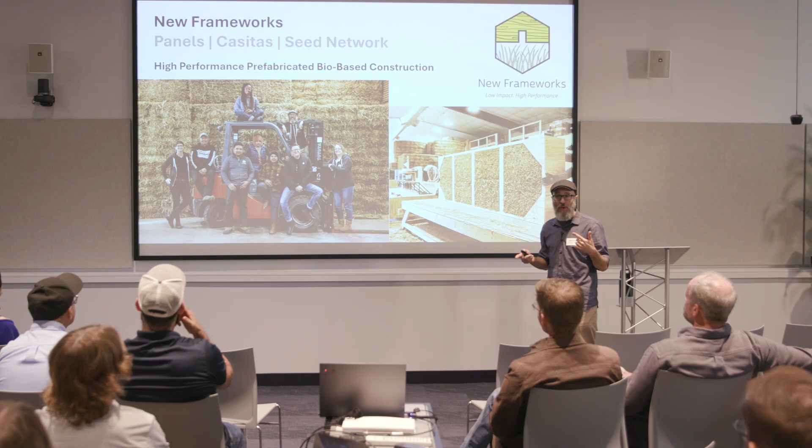All right, so I'm going to move us now into more practical applications of working with these carbon storage solutions, starting by using our company as a reference case. I'm going to move this pretty quickly. A lot of you are familiar with our work; for those who aren't, this will give you something tangible to hold onto.

This is about a third of our company—we're a 20-some-odd person, 21-person design, build, fabrication, and training firm, a worker-owned cooperative in northern Vermont.

We've been building with straw for 25 years or so, and I've been putting moisture sensors in those buildings the entire time, so we have a really high level of confidence in how to work with this material successfully in the Northeast.

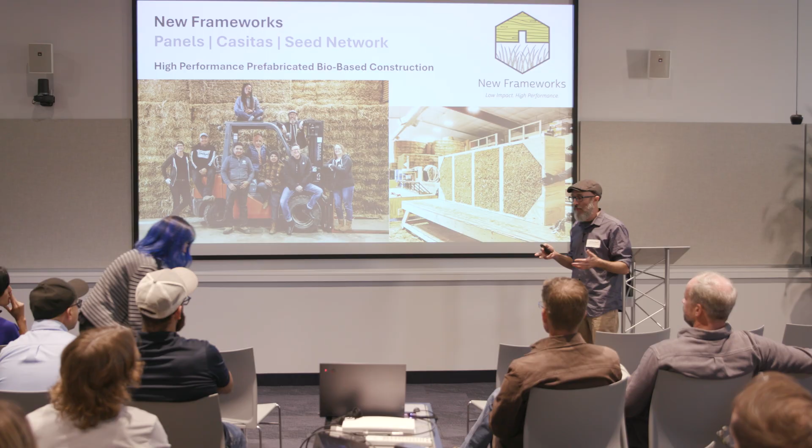We pivoted recently from building custom buildings to becoming a panel fabricator, now building straw and wood fiber insulated panels. Just to make this tangible, I'll move through this relatively quickly.

Our design and architectural team works on the Revit platform, so we frequently work with other architects and builders to take a design, panelize it, figure out the panel layout, and then turn that layout into shop drawings and fabricate it into panels.

We get the majority of our straw from our primary vendor, Aurora Farms, in the Lake Champlain Basin. They grow grains and are a core part of our regional food shed.

They're one of the few grain producers, period, let alone organic grain producers, in our region, and they produce a variety of retail and commercial grain products.

I want to pause for a second and talk about the land use impacts of our supply chains, and one of the additional values of investing in bio-based materials.

Lake Champlain is a very polluted body of water and is under serious pressure from the EPA to clean up the lake. One of the major sources of pollution is the ag industry—Vermont has a well-established dairy industry, and its effluent is a big contributor to what's fouling the lake.

So the fact that we're trying to invest economically in regenerative and organic agricultural practices in this very sensitive watershed is super meaningful for us. It's really important that this company survive and help maintain the integrity of preserving this watershed.

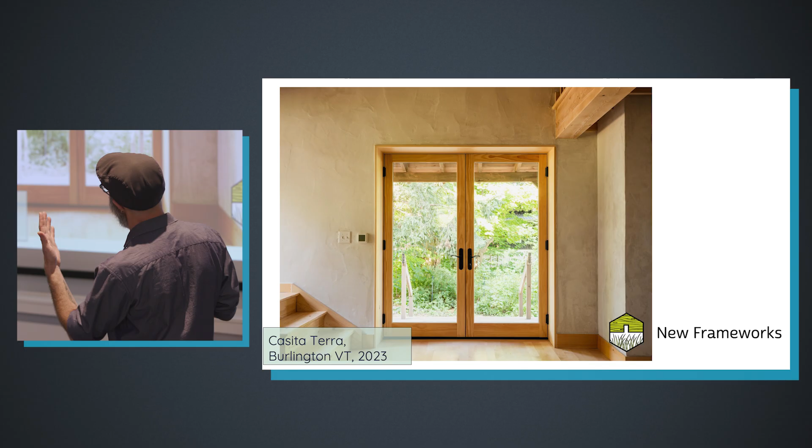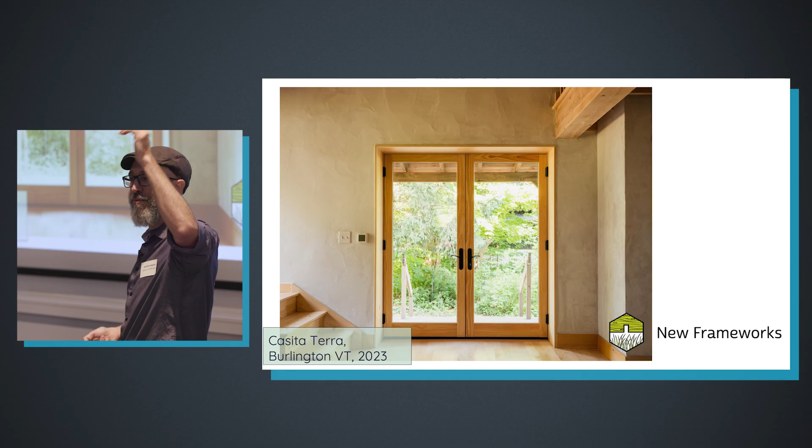Health is fundamentally critical for us. None of what we're doing holds any value if it's poisoning the people inside the buildings, and if that toxicity then percolates into the ecosystem at the end of the building's life. We started the whole carbon flow cycle talking about how toxicity from chemicals in finishes and materials can end up in waterways, depleting oceanic capacity for storing carbon and ruining atmospheric carbon balance—we'd have done no benefit by just putting straw on the walls. So there are more opportunities: where something is good for the health of the occupant, it's also good for the health of the ecology, and also good for climate. All these things build upon each other and add more value without taking more effort—we're just recognizing more value behind the decisions we're making.

We also use this for commercial applications. This is Soul Fire Farm, a fabulous farm—an Afro-Indigenous farm that addresses food justice issues in their region and trains up BIPOC farmers for the next generation of regenerative farmers across North America.

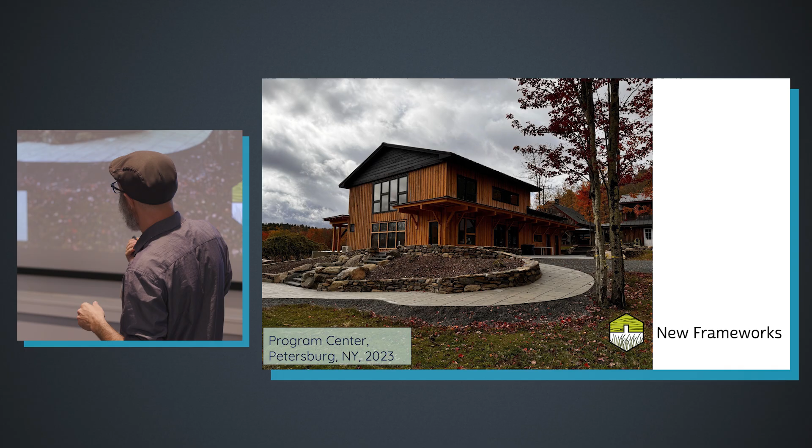And they host thousands of people for agricultural trainings every year. We built a program center for them, a commercial kitchen and dining facility. It's a little bit dark, so I apologize for that. But just to give a sense, this is a cantilevered, timbered porch hanging off the side of a double stack panelized wall. So we can do a lot of commercial applications. This doesn't just have to be for small ADUs. That's just our market. But this is also our market. This can also be used for much broader, more commercial applications as well.

This is why we pivoted to this. For a very long time, we were building like 1 to 3 houses a year. That was great, but there was no mechanism for scale. We tried doing workforce development in multiple different institutions for a decade and got nowhere, especially after the recession. We saw you couldn't even find carpenters, let alone people willing to learn how to build with straw and do hand plastering application.

So we pivoted to prefabrication as a mechanism of being able to get more carbon stored in more buildings. We're now over 400% increase, and we're expecting that to go even higher in terms of the number of homes we're able to touch every year.

And the cost is the other piece. It was getting almost impossible to build any new high-performance construction in our region for less than $500 a square foot. It's usually somewhere between $600 and $800. And we were delivering at or below $400 a square foot with our panelized homes—high-performance, all-electric, non-toxic, all the trappings of quality we'd hope to see. So we feel really excited about the opportunities of combining high-performance construction, panelized project delivery, and biogenic materials as actually being able to de-risk these and amplify the benefits of these different opportunities around how we're changing and transforming the built environment.

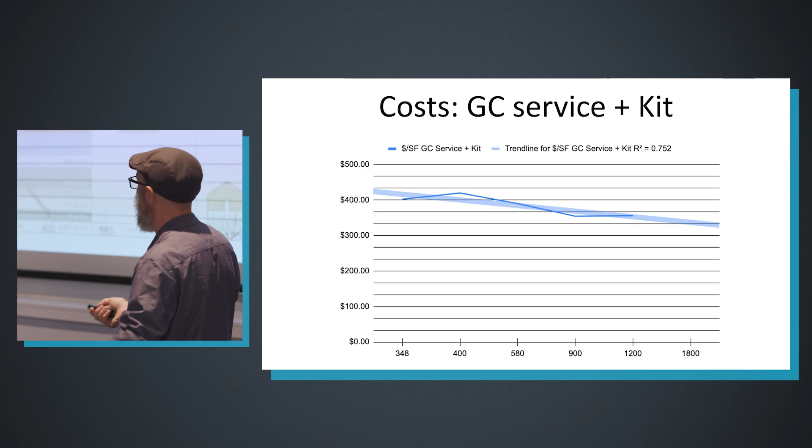I'm behind the BEAM tool, so I like carbon numbers. It was one of our goals—actually a mandate for us—that we created a building that was net carbon storing on day 1 of operation. One of the ways we did that was through straw. Another way we did that is by putting our buildings up on helical piers. Our buildings are light, so we can get away with that easily. It's also cheaper, it's also easier in a backyard, and it's also way more flood resilient, which is the big resilience category we have to manage in our region. So win, win, win, win, win again on a structural approach that may seem esoteric or banal.

Can you explain what the BEAM tool is?

Oh yes, thank you—the question is, can I explain what the BEAM tool is? So the BEAM tool is a material carbon emission estimator. It basically allows you to look at all the materials in your building, figure out what the carbon impact, the emissions impact, is, and solve for or optimize for carbon reduction. We go out of our way to value biogenic carbon storage and include a lot of materials that are biogenic in nature that aren't necessarily found in lots of other LCA tools, like hemp, straw, and cork, and various things like that. It's a free tool. I'm actively redeveloping it to be way better than its current version. So if you've used it and thought, I don't like Google Sheets—neither do I—it's going to be great. Let me know if you're interested, and I can give you more information about the tool and what's coming up for it.

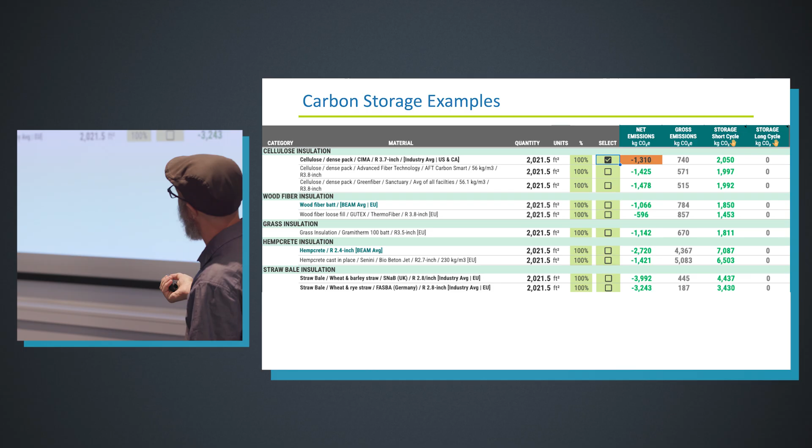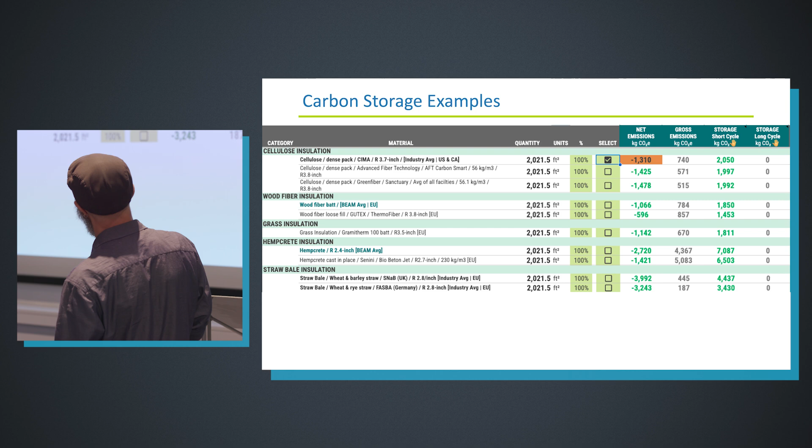This will just give you a quick peek at how this works. So we created this tool essentially as an advocacy platform for being able to enable biogenic materials to be visible in the market and incorporated into decarbonization strategies in the built environment. If it's not quantified and named, it's invisible and not viable as a solution. So that was part of the ethos of the tool. You can see in cellulose insulation, you're like, yeah, we know that's a thing. You can actually see what the gross emissions are—those are the real emissions released into the atmosphere—what the storage potential is, and in this case, because it's short cycle, we're evaluating that as a negative emission. So we subtract that from the gross, and then we get the net. You can see all these different materials and do a direct comparison across their different impact values for a given R value performance. Wood, it's more complicated.

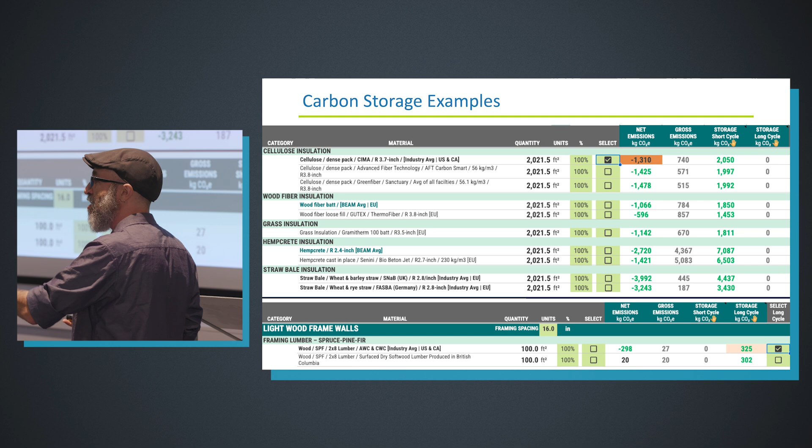We'll still show that there's a long cycle emission value, but you actually have to check the box. Is it okay to allocate a negative emission to that mass timber? Do you know where the wood came from? What was the forest management plan from that forest? Can you convince yourself that the atmosphere benefited from that? Great, check the box. If you can't, maybe don't check the box, but it's probably still going to be better than steel or concrete. This is how we can start to actually quantify this and make strategic decisions as we're doing material comparisons, building out assemblies, or coming up with whole home solutions around carbon storage.

So this is the accounting side of all of this. And yes, this is not looking at the re-release of those emissions at the end of life. That is not part of this analysis, so big caveat and asterisk around that, depending on how you LCA nerds are doing your accounting. That's very important.

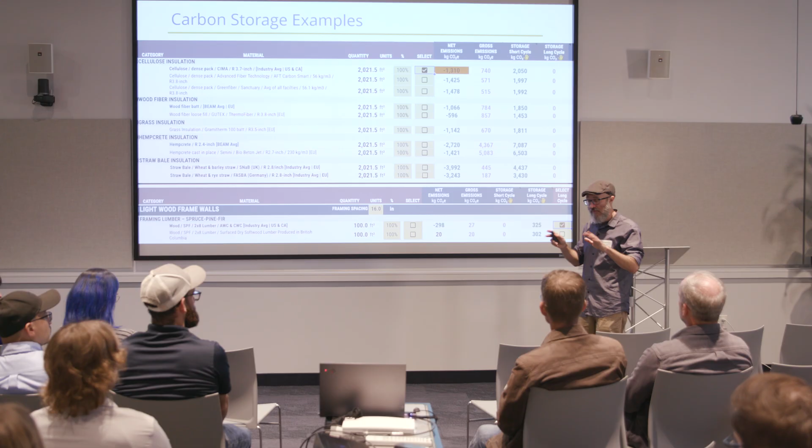Okay, I'm going to show a couple of case studies, show you some resources, and then we can go socialize. I don't want to leave you the impression that this is only about small little buildings. That's just where our roots are as a firm, and I wanted to give you something tangible.

I do a ton of consulting work. I worked with Andy Shapiro in Energy Balance and Maclay Architects, where we built out 34,000 square feet of dormitory and apartments for a residence-based high school in southern Vermont. Two different buildings, 22 corners, and I think 6 different roofs. Not a fan, but still had some really good outcomes.

So we did a very thorough analysis around this throughout the design phase. We modeled the building as a code-based building using business-as-usual materials, and we worked with the CM to define what they would typically use for all their materials. We looked at what that would be at the net zero ready level of performance that the building was actually designed and delivered at, and we see a bump because we're consuming more materials to achieve a better energy profile.

And I wouldn't say that's bad. That might be a reasonable trade-off, as I grimace using that language. I would never suggest that you downgrade the energy performance of a building, under any circumstances. We're just suggesting you don't have to accept this bump.

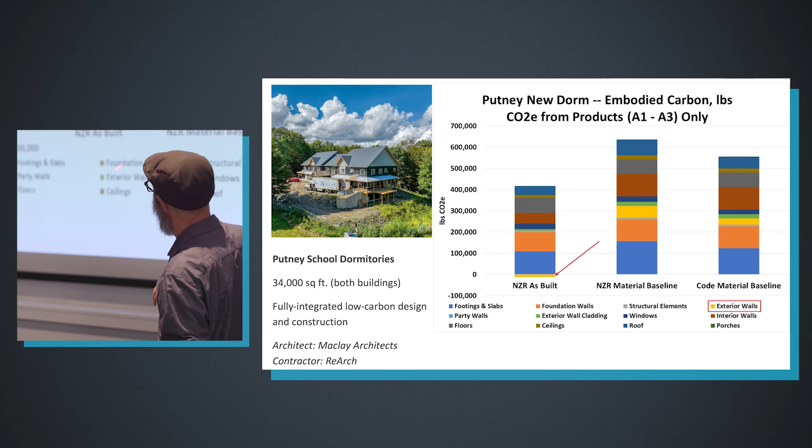We also optimized for materials and had a lower embodied emissions profile for a building than even what the code minimum building would have been, because we cared and we thought about materials and did the math and figured out the cost-effective solutions. This did not break the bank. This was not a major cost impact on the building.

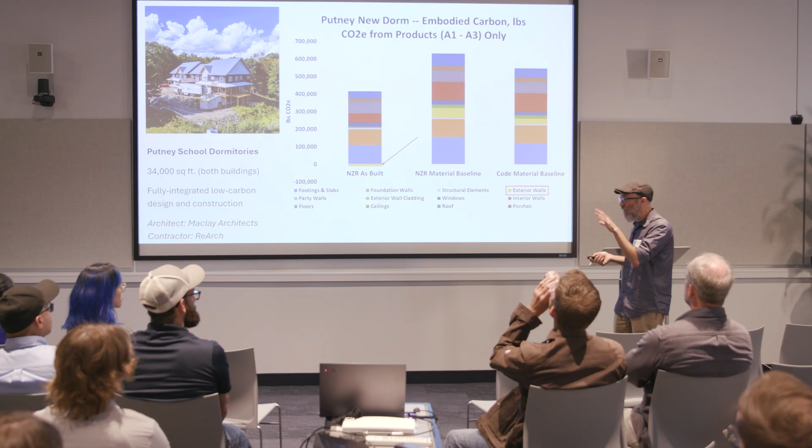There's a lot of cellulose. It's a double stud cellulose wall. It's not rocket science, and it's not particularly expensive, at least in our region. Some places cellulose is expensive. In our locale, it was not.

I want to shout out Christopher Nielsen and Bruner Cott, who led a fabulous project that I was involved with for Amherst College, building out a lyceum. This was the first new build. It's actually a combination of adaptive reuse of an old brick building and then a bunch of new construction under their new climate action plan. So it was very much under a microscope to understand what the full climate impact of this building was.

So from day one, we were looking at a full climate response approach to this building. And again, double stud cellulose construction in a 3-story institutional building. It was under a lot of pressure and evaluation from the third-party building enclosure commissioner, both through design and under construction. There's a ton of sensors built into this wall.

There's a great team led by Diana—oh my gosh, I'm forgetting Diana's last name. Anyone that remembers, help me out, of UMass Amherst. Find me later if you're interested and I'll give you her name. She's brilliant. Did all of the hygrothermal analysis in these cavities and found it is boring. Double stud cellulose walls work fine in institutional applications. There's nothing to see here in terms of significant risk from a hygrothermal basis.

So that type of research and innovation is super helpful in de-risking and normalizing the use of bio-based materials in commercial and institutional applications. We now have multiple case studies proving this out. And then a host of biopolymer carpets and a bunch of cellulose, really demanding EPDs and getting really good data on all of the most intensive parts of the building.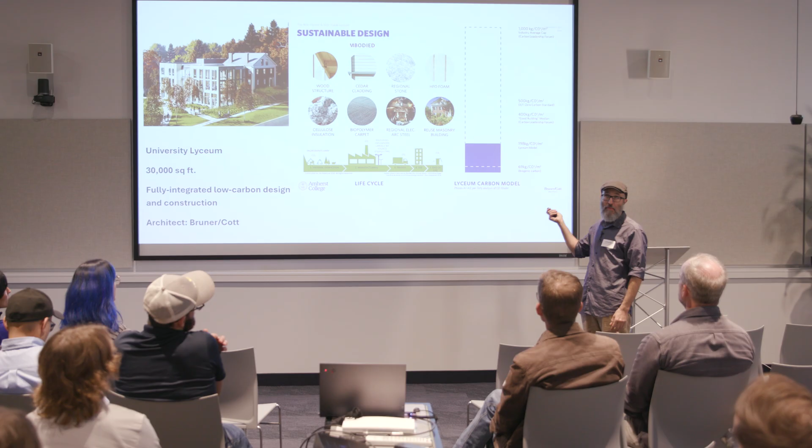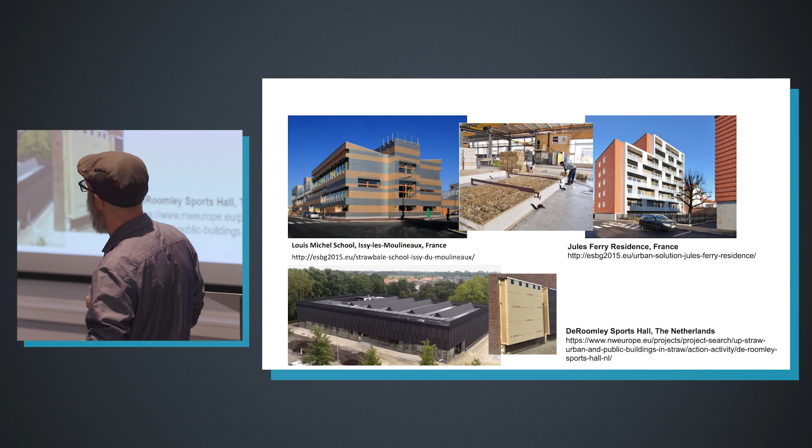I didn't want to leave you with the impression that straw is only for small residential applications. That's just in the US, because we're literally a generation behind Europe in their application of straw, and hundreds of years behind the entire non-industrialized world that has been using these materials consistently and successfully in large-scale applications. Just look at our closest neighbors in France — they now have dozens and dozens of public schools built from prefabricated straw, largely because of the health benefits. This is standard construction now.

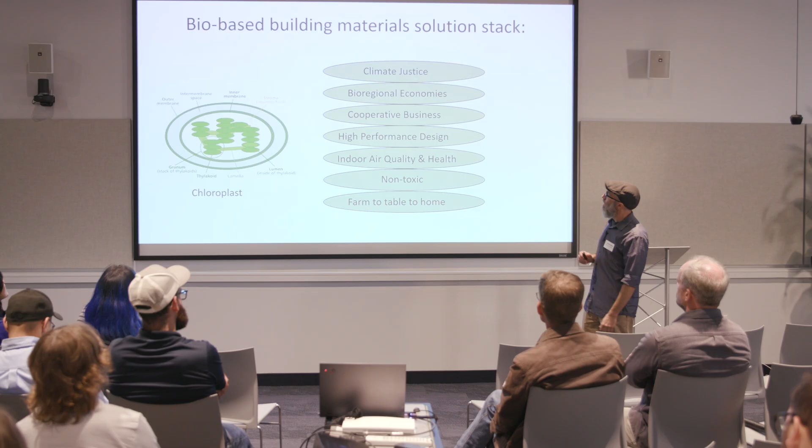There was, I think, a 100,000 square meter logistics center just built out of straw panels in Scandinavia — Denmark, I want to say, or Sweden, one of those two countries. This is not a technological problem. This is a matter of us catching up with what is becoming standard practice in many other parts of the world. I'm also looking at this very heavily from a climate lens.

If it's not clear at this point, let me be very explicit: there is a stack of benefits that associate around this. I've already talked about toxicity and human health, and the ability to achieve high performance design with these materials.

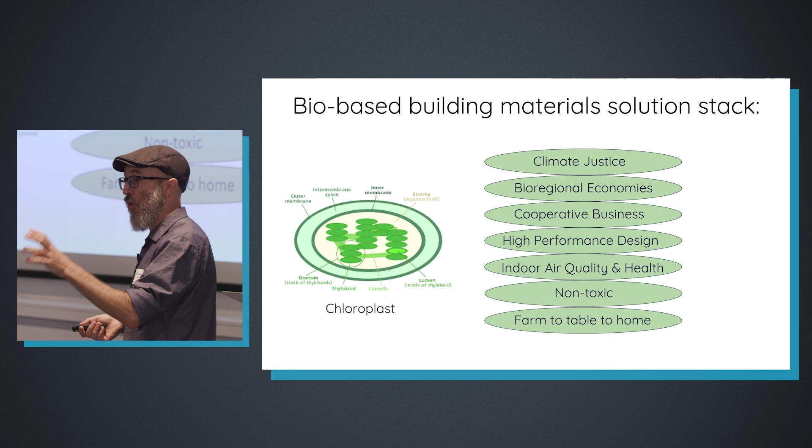From my experience working with straw for 25 years, it is way more resistant to moisture infiltration in buildings than fiberglass insulation. Foam insulation may be fine itself, but then all that moisture risk gets pushed onto the adjacent sheathing or framing. I have high levels of confidence in working with these bio-based materials and achieving durability, performance, and all these other values.

I do want to pause for a second and talk about climate justice. This is the first time I've presented with kind of an open platform since June, when one of our co-owners and one of our managers at New Frameworks was illegally and violently detained by the federal government. For those of you who know the story and have been supporting our company, I greatly appreciate that. I bring this up because it really matters in practically adopting these strategies.

There are policies — not just around immigration, but also fiscal policy, let alone climate policy — that we're now operating under, which are a direct harm to our industry, our workforce, housing policy, and the economic environment in which we're trying to address these critical issues. We've seen this repeatedly, and it's frustrating to me not to see the building industry calling out the direct harms coming from immigration policy, just purely from a workforce development and economic basis, let alone human rights. If that's too political and we want to put it aside, fine — we can just talk about the economic and workforce impacts of these policies.

If we're not talking about this, I'm talking about it now, because if we don't, it becomes normalized. It is not normal, it is not acceptable, it is harming all of us in our industry, and we need to say that out loud and repeatedly so we don't just comply in advance and let these policies persist, hoping it doesn't somehow land for us. It landed for us directly and continues to dramatically impact our company and our community professionally, and it's only going to increase the risk we all face in trying to achieve climate goals.

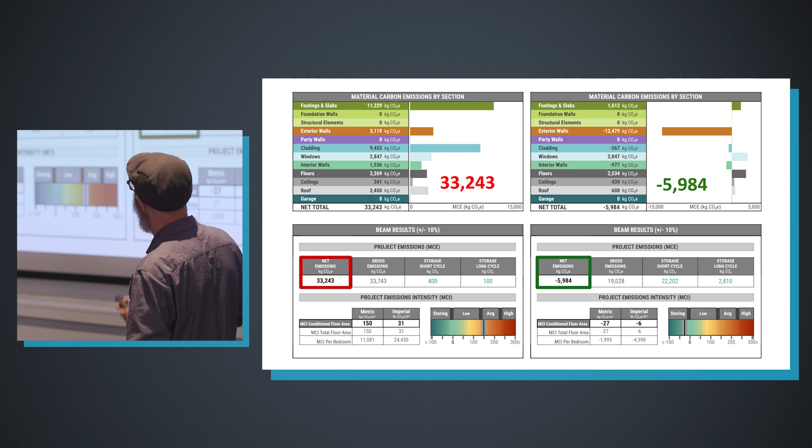So great, that's nice at the scale of one building. I know I'm talking to a largely commercial environment here. I'm going to make an analogy in a minute, so bear with me.

If we look at the projected need for housing within the Northeast by 2040—this is an accumulation of state level housing growth requirements and projections for each of these states—we get about 2 million new units required in our region. So what's the impact of that if we're using business as usual to address the housing crisis? Well, using the worst case, business as usual, that's like putting 20 new coal plants online between now and 2040.

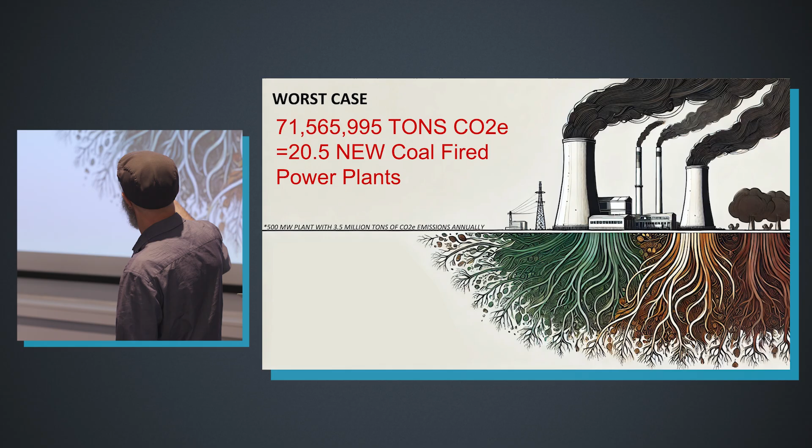If we can even achieve this, because one-third of our labor force is under risk of deportation. But if we can actually do this, we are going to decimate any hope of meeting any of our climate goals if we're working with business as usual materials. But if we take on the challenge of solving for both problems, we can both remove carbon dioxide from the atmosphere and store it in the fabric of the built environment as we're developing those housing solutions. So if we're talking about scaling this up in the context of low-rise, light, small buildings, those of you working in the commercial space can imagine how that amplifies its scale when you're working at buildings at larger scale.

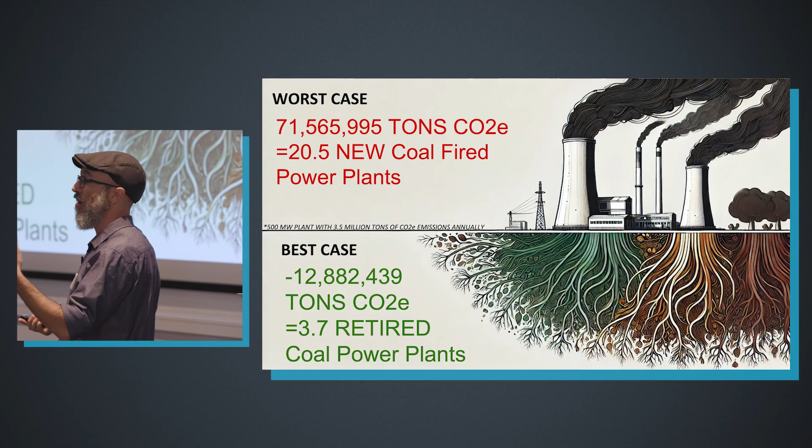Granted, storage is way harder in commercial buildings, but just looking at the opportunities for impact reduction in the material basis as we're continuing to build out more commercial, non-residential fabric, or larger residential buildings—which seems to be a growing trend in addressing our housing solutions—this really matters. Just imagine this ballooning out in scale as our buildings get larger.

I'm going to move through this relatively quickly. This is largely resource sharing and inspiration, so don't panic if I blast through these resources quickly—they'll all be captured by the video, and I'll share the slide deck out. But I'm going to bring us into conclusion here.

Like 10 years ago, we were still trying to figure out what embodied carbon is. Do we care? How do we even measure it? Within a decade, we've gotten to the point of having a sense of scale, knowing the basic hotspots, having some basic prescriptive low-hanging-fruit solutions we can use, and a bevy of tools in the market to analyze this. That is lightning fast relative to those of us who have been in the energy world forever. And so this is where we are now.

I'm going to speak from the residential perspective as a case study, and I'll talk about some non-residential situations as well. There is now a standard about to emerge that will standardize how we do this evaluation for residential construction. That is crucial, because it will enable the ability to start setting regulatory structures around requiring that reporting. We're already seeing that in the commercial space—commercial is ahead on that, which will then lead to limits and actually get us towards the reality of carbon-storing buildings. It's not enough to have the technical solutions; we need the economic and regulatory structures to be able to compel those solutions to be used.

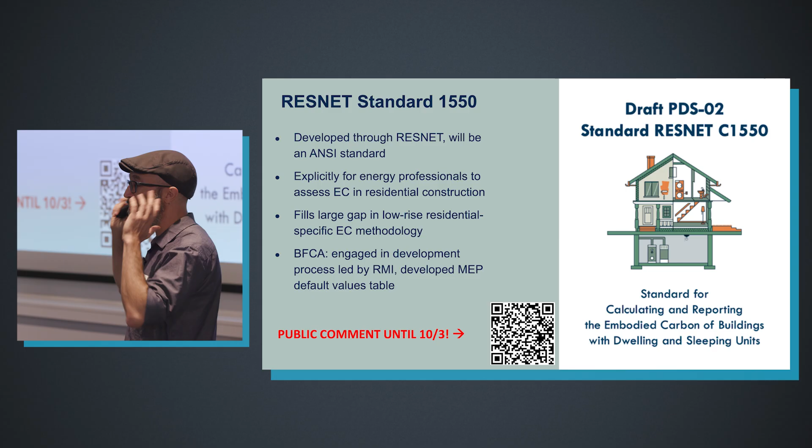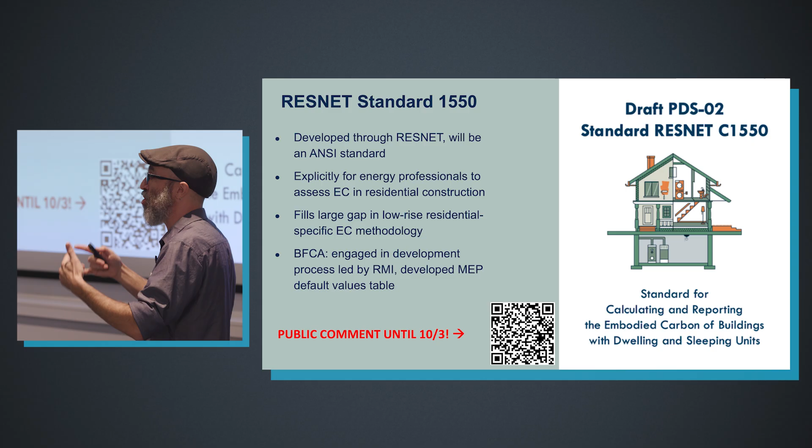This is going to be done by energy raters, and that is the community most readily touching these buildings. It's also a direct link from a single knowledge source between energy and operational emissions and embodied emissions, which is the whole thesis behind this—that we need to look at these things together to make our best solutions. Now we have a workforce trained around analyzing buildings that can expand their scope from energy to material assessment, and bring that into a harmonized workflow, tool stack, and communication stream throughout the entire project delivery process, which is particularly valuable for production home builders, which is how the majority of residential construction is built in the US. So huge opportunities to unlock all of this development at scale by just standardizing how we all look at the same thing. This is tremendously exciting.

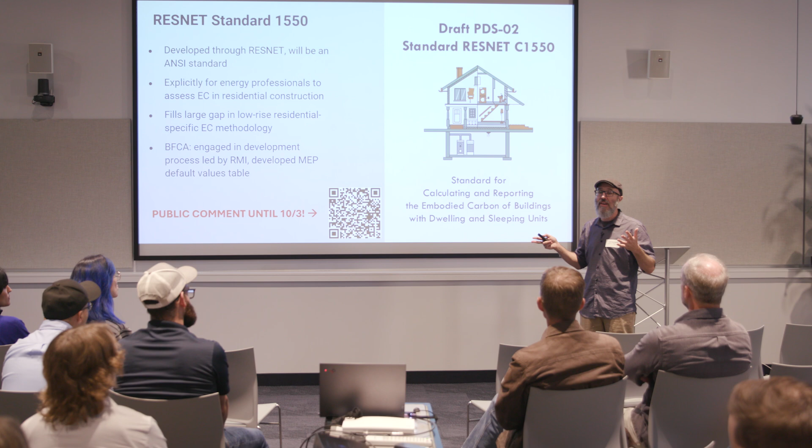To that point, I'm going to talk about a couple of Massachusetts-specific things, since this is a Mass crowd. Thank you, my friend.

We just completed—the report will be released by the end of the year—a 100-home benchmarking study, where we not only benchmarked 100 homes in Massachusetts to get a good walking-around number to base our incentives and regulatory structures around, but also did rigorous testing of the standard to make sure there was an iteration process as it's under development, working through industry preparedness and workflow development for raters to understand how they're going to conduct this analysis.

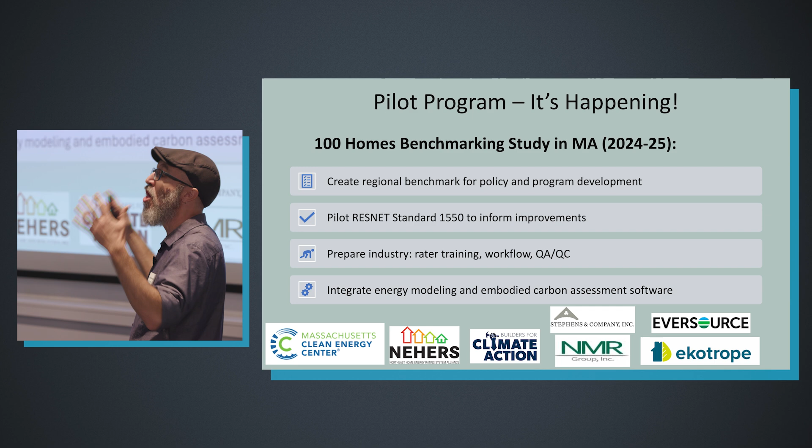And for us as tool providers—me with Builders for Climate Action, working with Ekotrope as an energy rating software—to figure out what tool integration looks like and really take the friction out of the process of moving information flow from a rater taking inputs from a building and pushing that all the way through to getting an embodied carbon metric. So we are well along the way in conducting this work and having low-friction, high-volume, scalable assessments in all of these buildings. This is thrilling in terms of the capacity to really transform the industry and bring this metric into our purview.

So for those of you that have worked with BEAM and are mildly or majorly disappointed with its performance, I'm excited to say we're going to have a 1550 compliant energy model tool integrated version of this software coming out in the near future. If you're a software geek, talk to me and we'll nerd out over drinks.

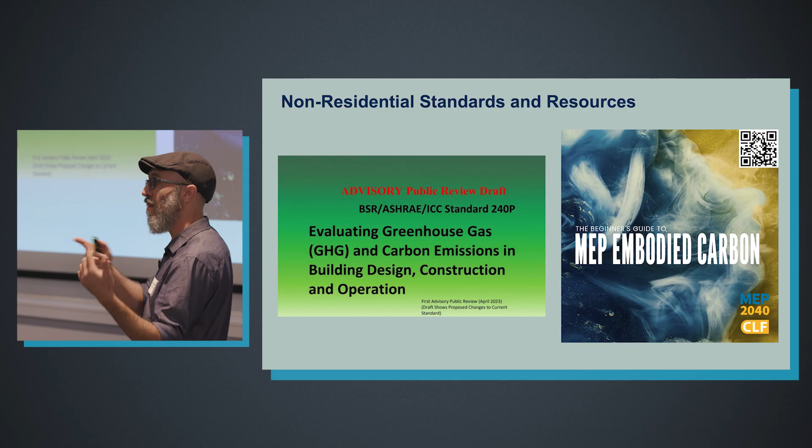There's also really exciting stuff happening in the non-residential space. This is even larger, and I'll point you to resources for that. I wanted to call out that the non-residential counterpart to 1550 is ASHRAE 240P, which is undergoing review right now. That's going to be a long and winding road to its delivery, but it's a unified standard looking at both operational and embodied carbon emissions. Really important to learn how we can look at those things together. If you're on the non-res side and want a standard for this, it's still under draft development, but it's exciting to see.

Just the amount of resources coming up is amazing. I'm bringing up MEP 2040, a collective impact organization addressing emissions from mechanical, electrical, and plumbing. They just released a beginner's guide on how to start conducting this work. What's really cool is that that's going to inform standards like this one, which will codify best practices like that. There's an iteration cycle around our knowledge base, our policy development, and our practical application that is really accelerating the adoption, quality, and rate of all this knowledge and practical application. That is thrilling, really, really exciting.